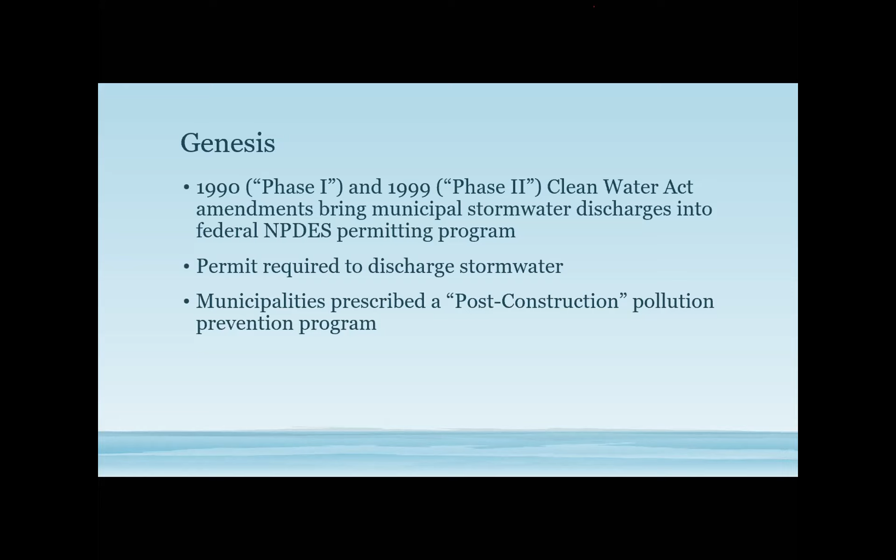But we will go back to the 90s when the Clean Water Act was amended to bring municipal stormwater discharges into the federal NPDES permitting program. NPDES stands for National Pollutant Discharge Elimination System. The powers that be at the time recognized that water quality goals weren't being met by only regulating discrete point source discharges from wastewater treatment plants and certain industrial facilities, and that a significant amount of water quality problems were occurring as a result of discharges of stormwater from municipal areas. The two amendments, phase one, addressed municipalities over 100,000 people, and the second amendment, phase two, addressed the smaller municipalities. Those amendments required that municipalities adopt pollution prevention programs in several program areas. The program area applicable to low impact development was called post-construction at the time the amendments were made.

Post-construction refers to, just like it sounds, the stage of a project from the time construction is completed into the future for the life of the project.

The Clean Water Act amendments recognize that it's not only the pollutants running off these developments, but also the quantity of water running off these developments that causes water quality issues downstream. The Clean Water Act language stated an explicit goal for developments to maintain pre-development runoff conditions to the extent practicable. So it wasn't a hard line, you shall maintain pre-development runoff conditions, but it was definitely a recognized goal.

Out of the recognition that there are these water quality issues associated with pollutants and water quantity, the Clean Water Act required that both structural and non-structural BMPs be developed and implemented for municipalities to impose on new and redevelopment projects in their jurisdiction.

Over time, the sum collection of these BMPs, at least in our North Coast region, the term kind of morphed from post-construction BMPs to low impact development, or LID BMPs. So that's the term we currently use here in the North Coast region and many other parts of the country.

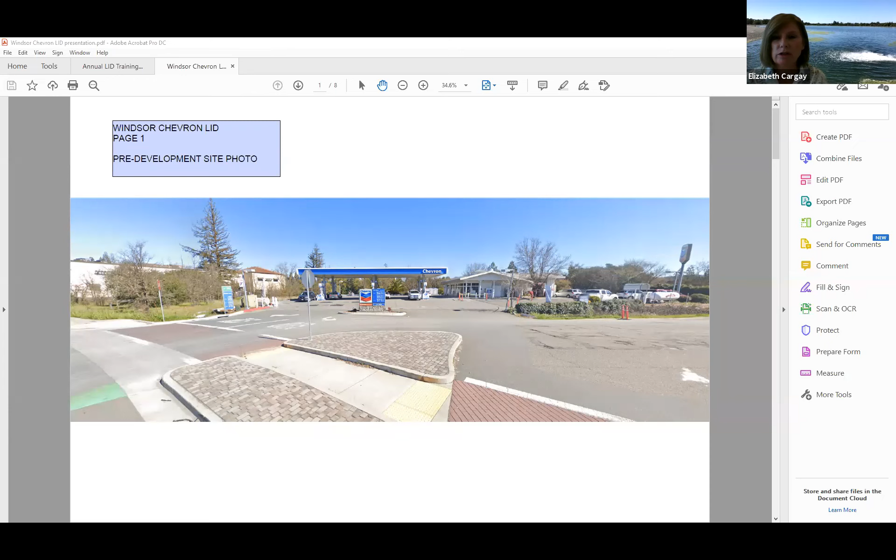And so this is the Chevron gas station in Windsor. It's right off the freeway. All right, Matt, take it away. Okay, great. So can everyone see the picture of the Chevron station in Windsor?

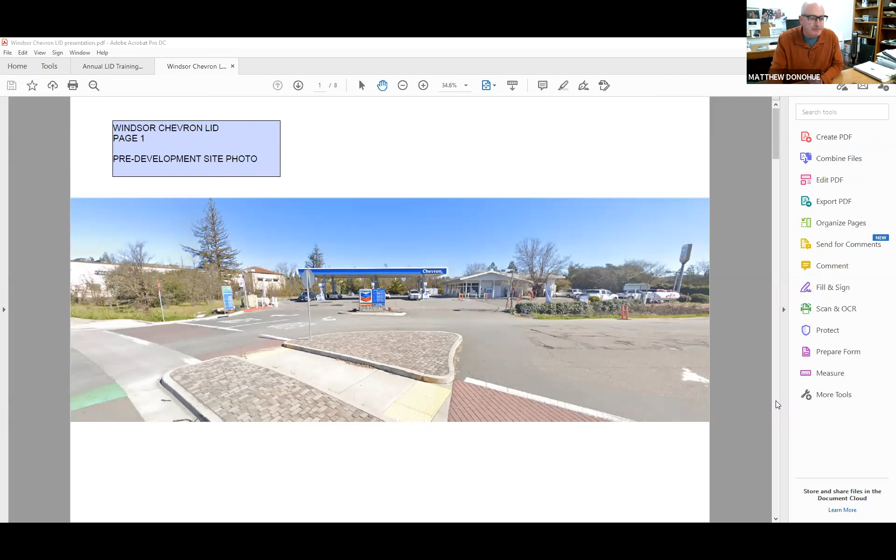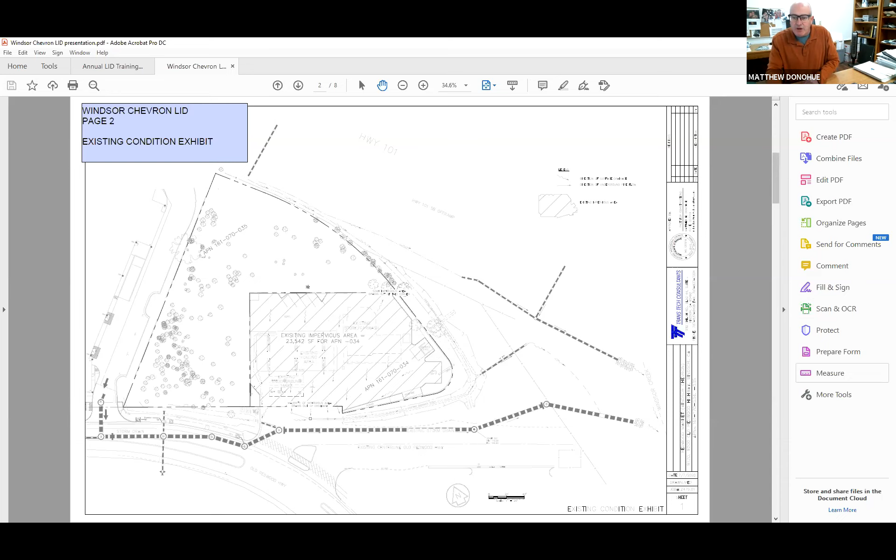I'm going to move on to the initial development plan. Let me go over some of the features here. One of the fun things is this pedestrian bridge overhead. Part of this project is to bring a pedestrian bridge over Highway 101 to connect the east and west side of town.

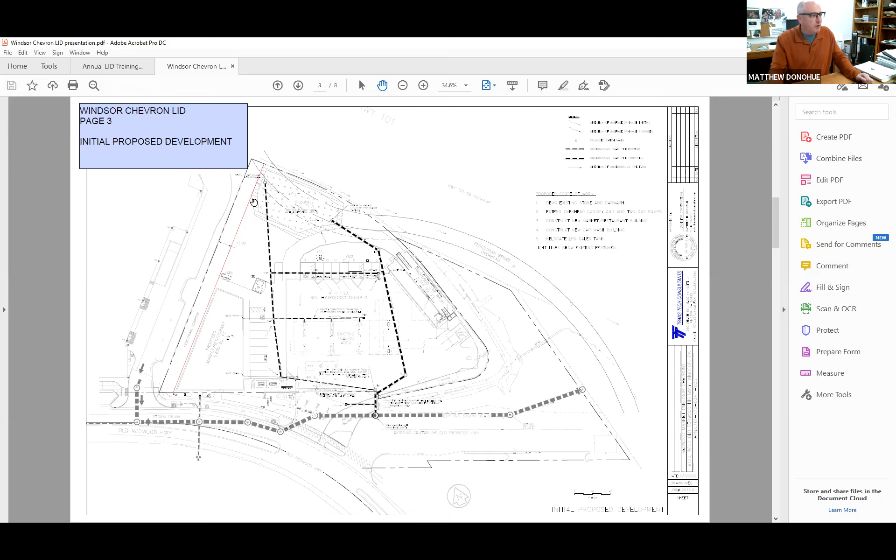The development plan was to demo this store and build a new store over here, put in a new car wash, and the pedestrian bridge. It was subject to LID because it created or replaced about 26,000 square feet, which is more than 10,000. Because this is less than an acre, treatment plus delta volume capture is required. We also proposed a generator that could power the stormwater pump in case of power failure.

The water board rejected this proposal because they felt infiltrating stormwater into the ground at this site would aggravate the contamination situation. They gave us a couple of options: either find an offset project to do your infiltration, or mitigate the risk to groundwater resources.

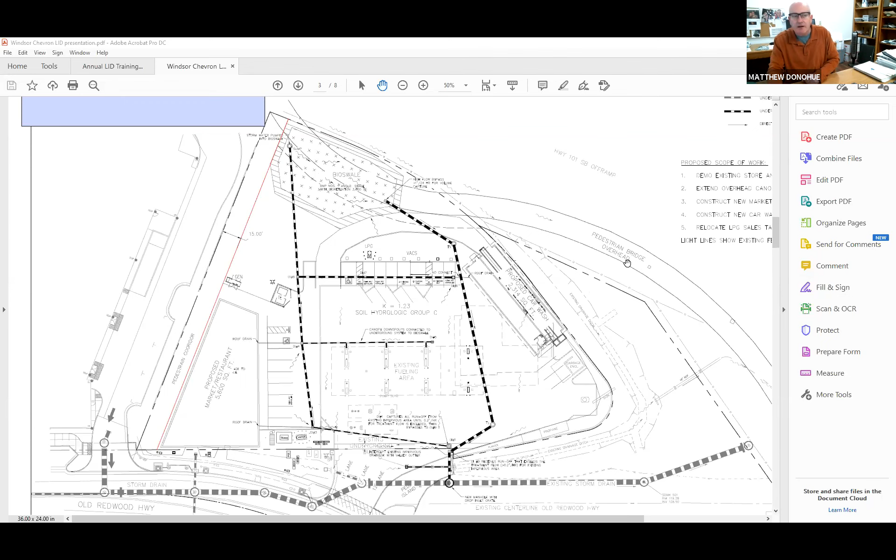So we tried to do the mitigation at first, and that is this plan. Let me zoom in here. This is a map from an environmental consultant - it was a barrier plan. This blue line was a proposed groundwater barrier. The contamination is here where the tanks and dispensers are, and here was the proposed bioswale. What's not shown on this map, but critical to point out, is that groundwater flow direction was from north to south - basically the bioswale was directly upgradient of the contamination.

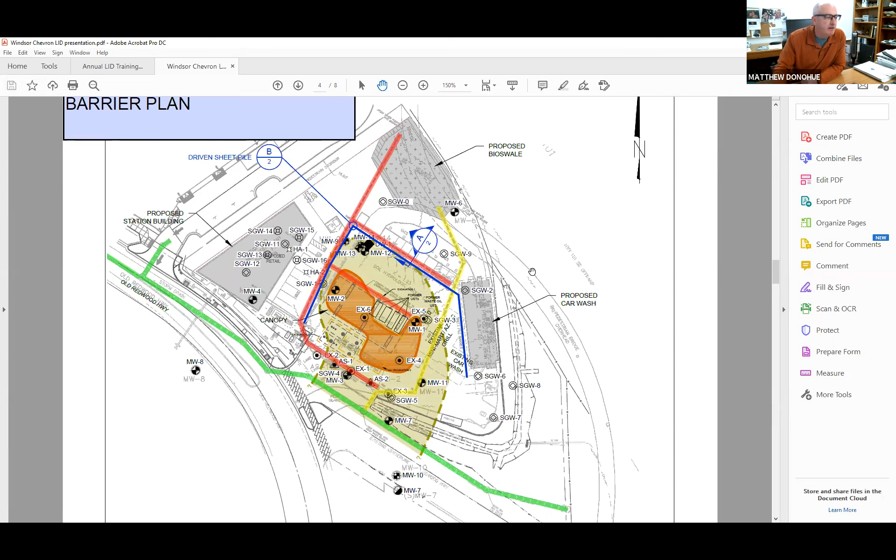So that's obviously what the concern was. We had proposed putting in a barrier so that when stormwater was discharged in this bioswale and some infiltrated, it could move around the contamination and not spread it. I've got a section drawing showing a section view of the barrier - it would be 15 feet of steel sheet piling, and the top 5 feet would be a 20 mil plastic membrane, which would direct the groundwater around the contamination.

This concept was declined by the town, and the town offered a location to do an offset project at Building 100 at Public Works. And I think Elizabeth has got something to say now.

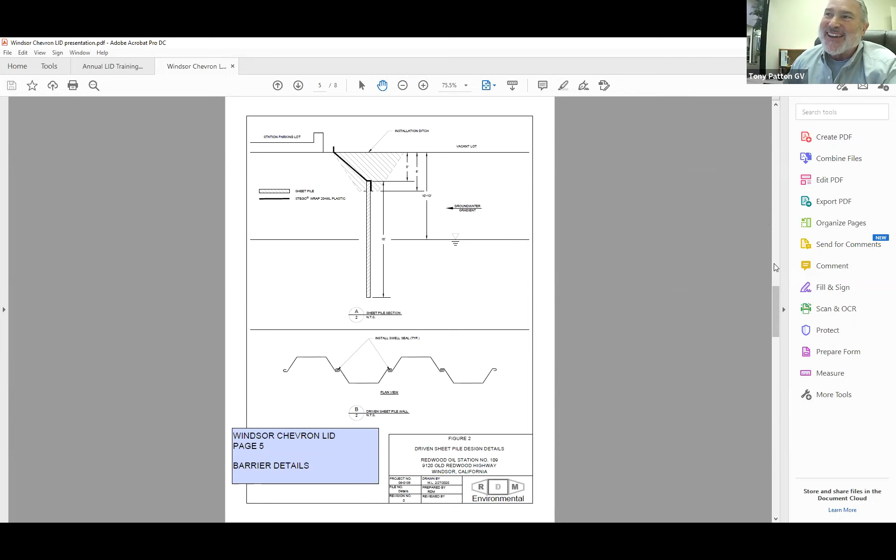Okay, thank you. So from the town's perspective, we talked to the regional water board, and the water board requested that Redwood Oil and the design engineer consult with the town to ensure, they used these words specifically, that the town would be able to effectively oversee the operation of a treatment configuration and ensure compliance with our permit.

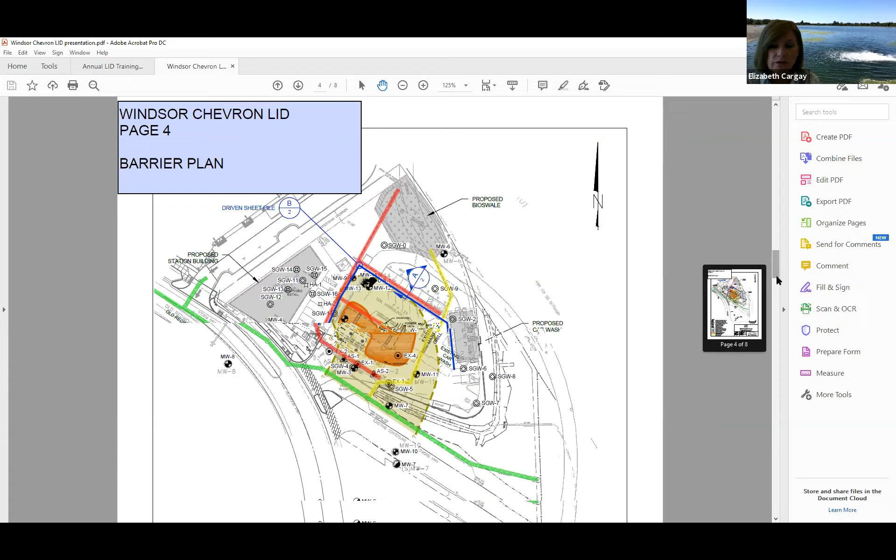So we reviewed the location of everything, the groundwater depth, flow, and direction. This bioswale, to reiterate, was proposed to be constructed up gradient and within 75 feet of this petroleum groundwater plume. Past monitoring data showed that a couple of times the groundwater had come within 2 feet of the ground surface, so it was very shallow.

But in the end, in reviewing all that data, the town was not supportive of this bioswale or any type of stormwater infiltration at the site, due to the potential of mobilizing or dispersing the existing groundwater plume and any potential future groundwater contamination.

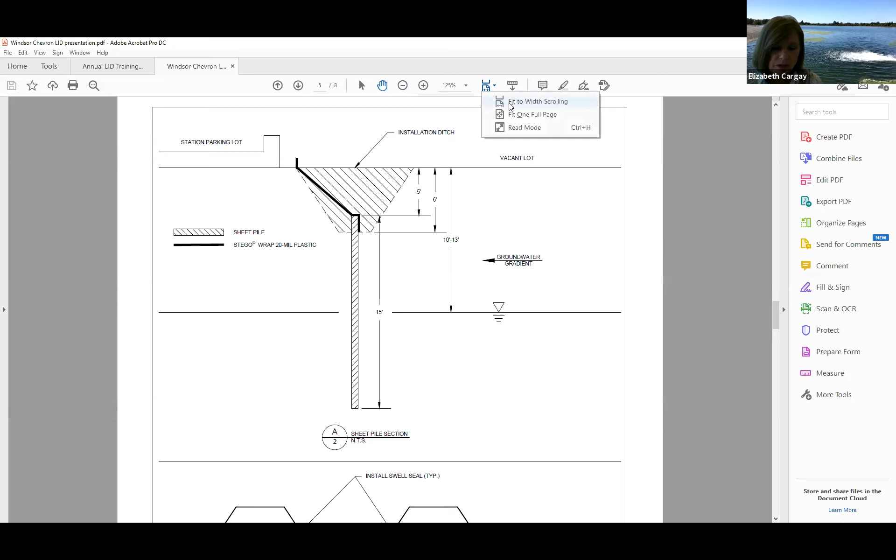Our permit specifically says that BMPs should not be proposed in proximity to a contaminated groundwater site where infiltration poses a risk of causing pollutant mobilization, and site constraints prohibit the ability to infiltrate stormwater due to shallow groundwater. So we really felt we could not effectively oversee the operation of a bioswale system up gradient and adjacent to that contamination, and could not ensure that stormwater pumped into the bioswale wouldn't pose a risk affecting that existing plume or any future plume.

And there's a Shell gas station with a petroleum hydrocarbon plume across the street, down gradient of it also. So there were too many factors. The town just worked with Matt to determine the offset project, so Matt can tell you about this project.

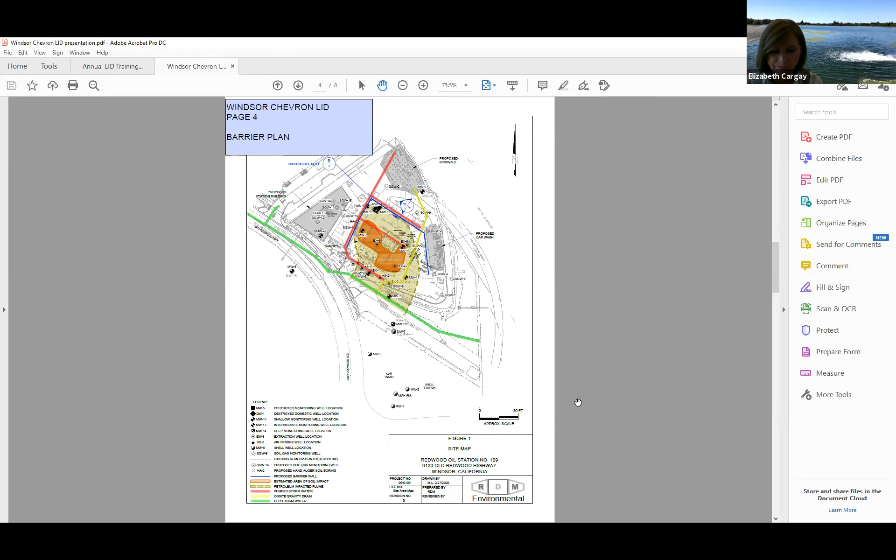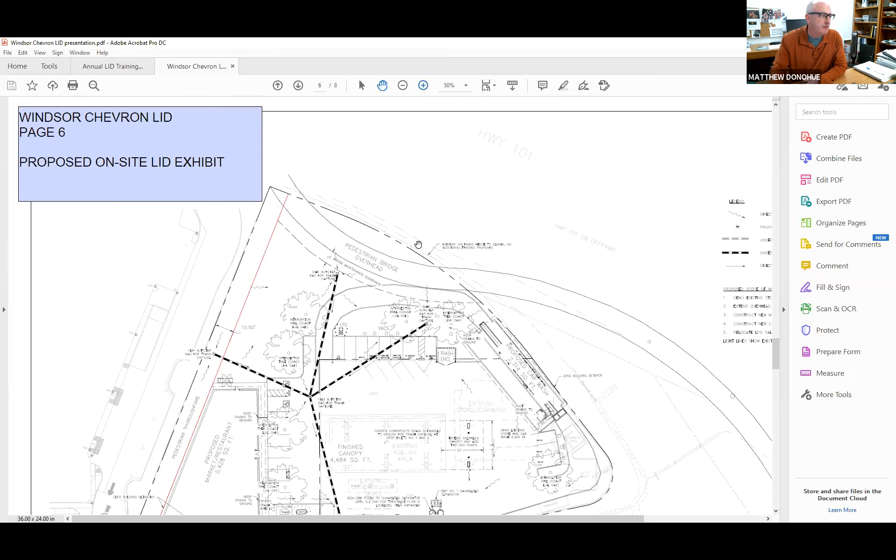Okay, great. The way I have this presentation set up is that first I'm going to show our new site plan without a bioswale and talk about what we are able to accomplish on site, and then we'll look at the offset project, which is on the town of Windsor property. So this is the plan without the bioswale, but it still has some LID features: interceptor trees and a chambered separator.

Now, a chambered separator is very low on the priority list in the LID manual for a lot of good reasons. But in my personal opinion, a chambered separator is the best BMP for a gas station because it easily captures hydrocarbon spills, and they're easy to clean out using a vacuum truck. Whereas a bioswale, I just think is a terrible BMP to use at a service station because it's not a good way to capture a spill, and it's very difficult to clean if one gets in there, as we already have a contamination problem.

But as you know, the bioswale, or the wetland, there are a couple different words for it, is sort of the only option you have to treat some of these contaminants, trying to treat dissolved metals with some sort of technology. You find it's very difficult to implement on a small scale site like this. That's my finding from not only working on this project, but also from doing industrial stormwater consulting. It's very difficult to get dissolved metals out of the water once they get in, but the bioswale just allows you to show that as treatment.

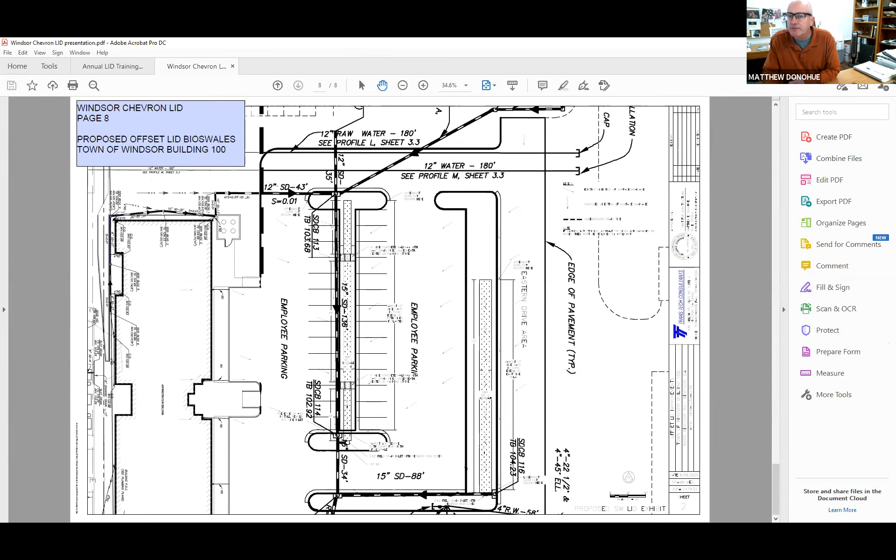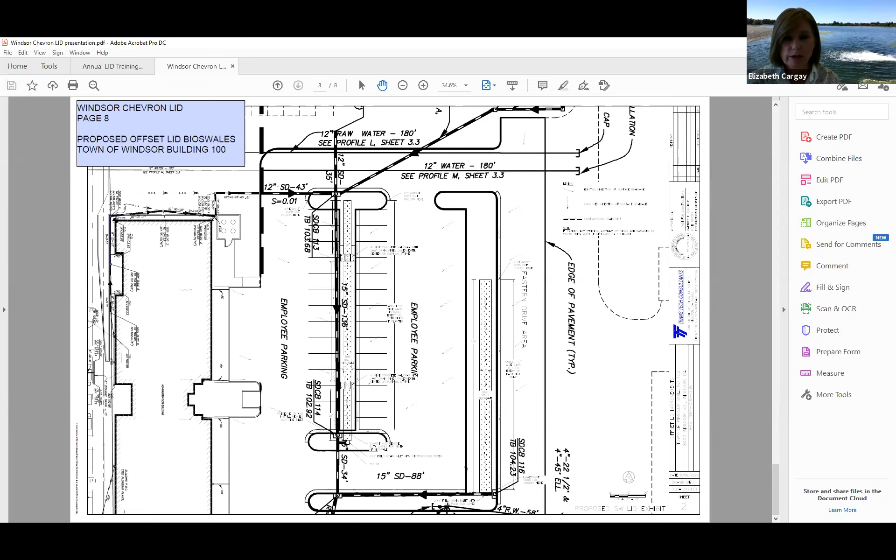Elizabeth? Yeah, so we presented this to the water board, and they were open to allowing this offsite offset project. They wanted to encourage it, with two things they asked for: to maximize opportunities like interceptor trees on the project site, and to propose the chambered separator be modified to see if it could remove the metals.

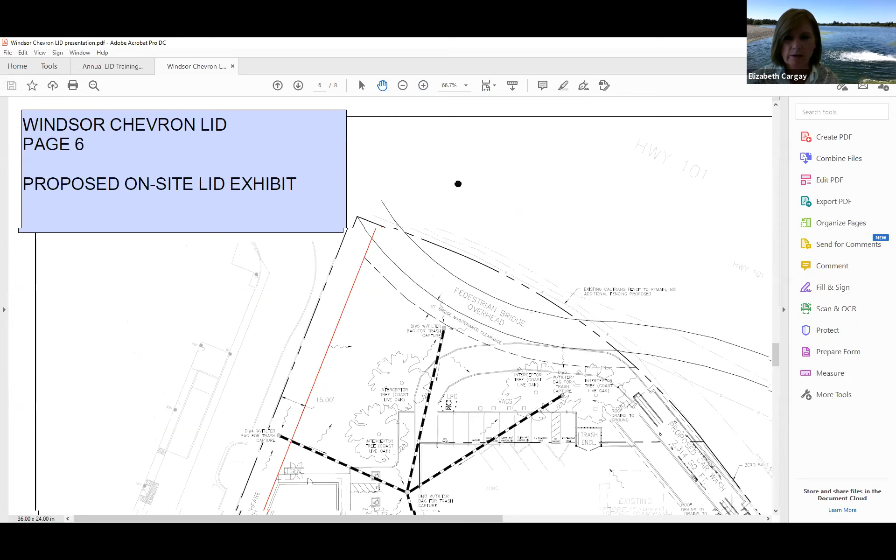I think Matt kind of talked about that, but he was able to add some things, right, Matt? Well, I haven't added anything to the chambered separator that I can show in any meaningful way with calculations that will help remove dissolved metals. So this proposal basically says dissolved metals is part of the offset. But the chambered separator does have some socks in it that suck up hydrocarbons and other oily materials, plus the natural gravity action and everything else it's good for. That's something you have to work out with your water board, because it's just not in the manual about exactly what is offset and what isn't. In this case, we're offsetting infiltration and dissolved metals treatment.

But you did add a few trees, right? You added some, a bunch of interceptor trees. Yeah, so you did do that. With those changes, the water board accepted the project, and Matt is now in the design phase.

And that's the end of our presentation. Any questions?

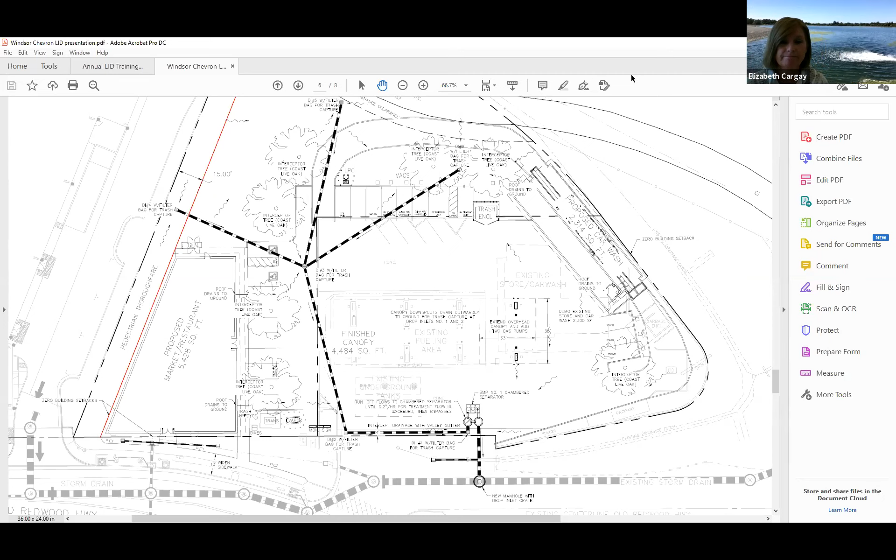So on those interceptor trees, do they have that structure the tree goes into — we did some on Stony Point years ago — or are they just trees planted in the ground? They're just trees planted in the ground.

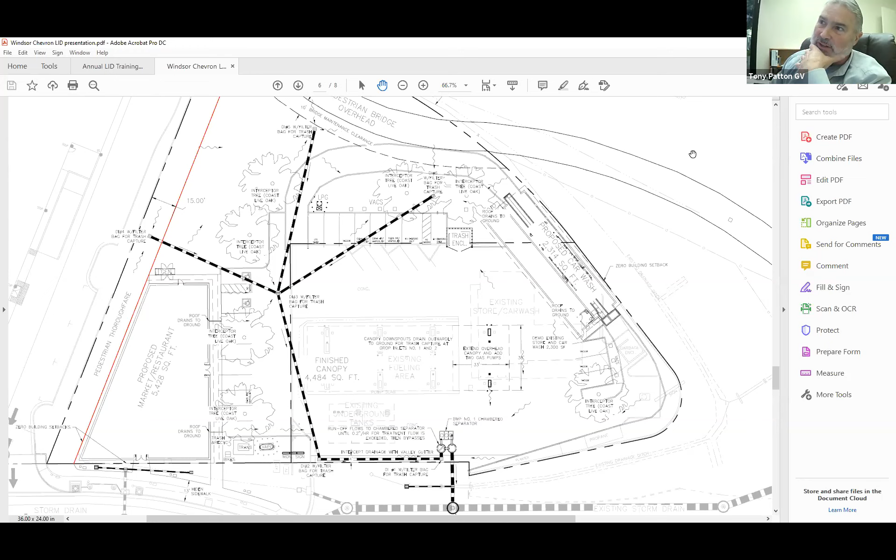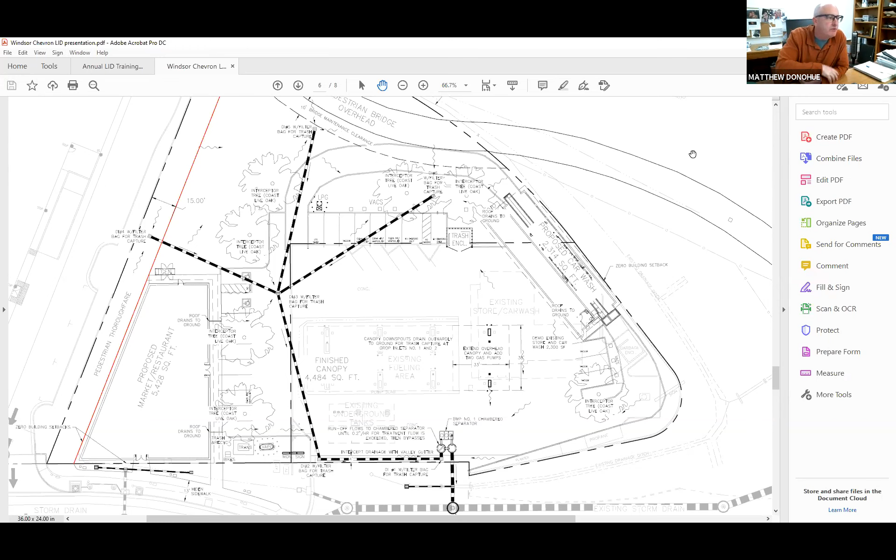In other words, we're not claiming any sort of infiltration area around them, for obvious reasons we're not allowed to. So you're just using the natural effect of what the tree does, and you're not adding anything to it. Okay. Yeah, I suppose interceptor trees capture some storm water and release it more slowly before it hits the ground. But once it hits the ground, there's no infiltration on this site. So the treatment then goes to the filter bags and the catch basins, and then to the chambered separator. Got it, all right, thank you.

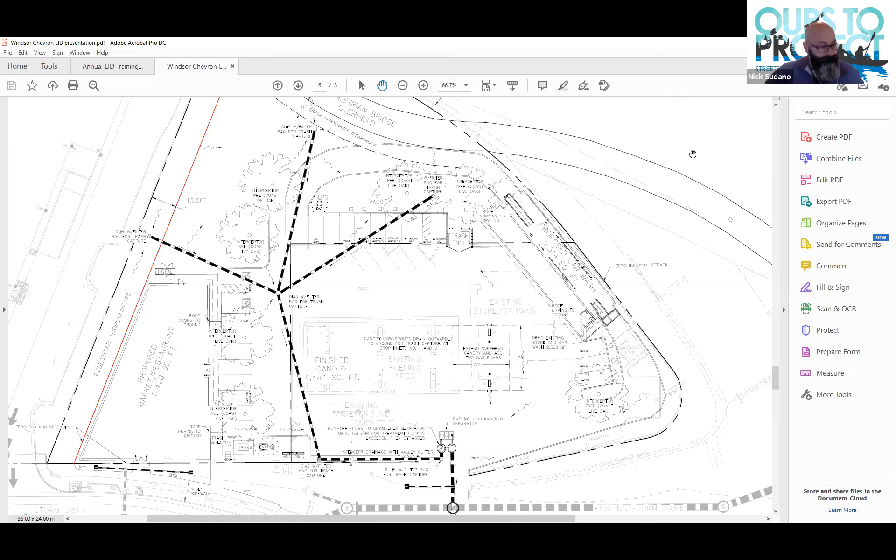All right, anybody else out there with a question? I have a question, Nick. Go for it, Rick. I was just curious, since this project is for an offset for the gas station, does it also...

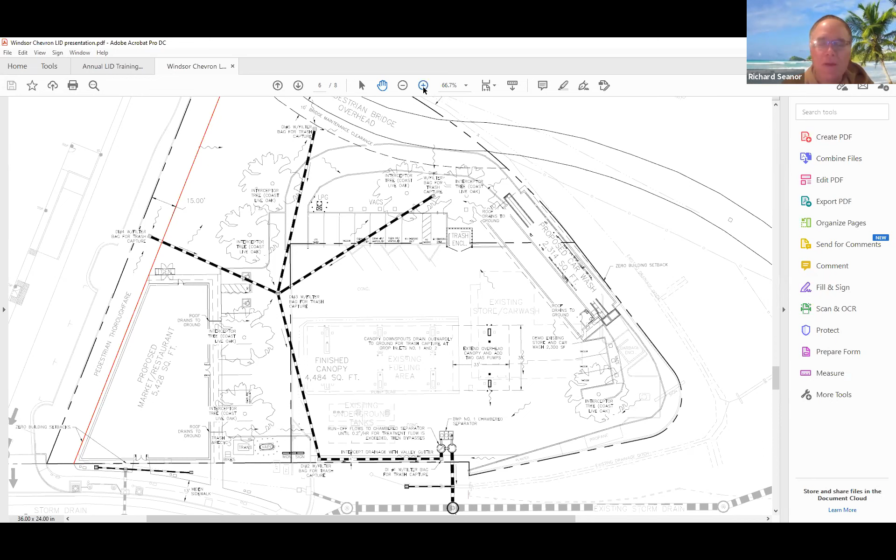Does it provide the LID treatment for the entire city site, or does it only qualify as the offset for the gas station? Say, for example, if you were going to do some future expansion at this location, would this proposed LID account for that?

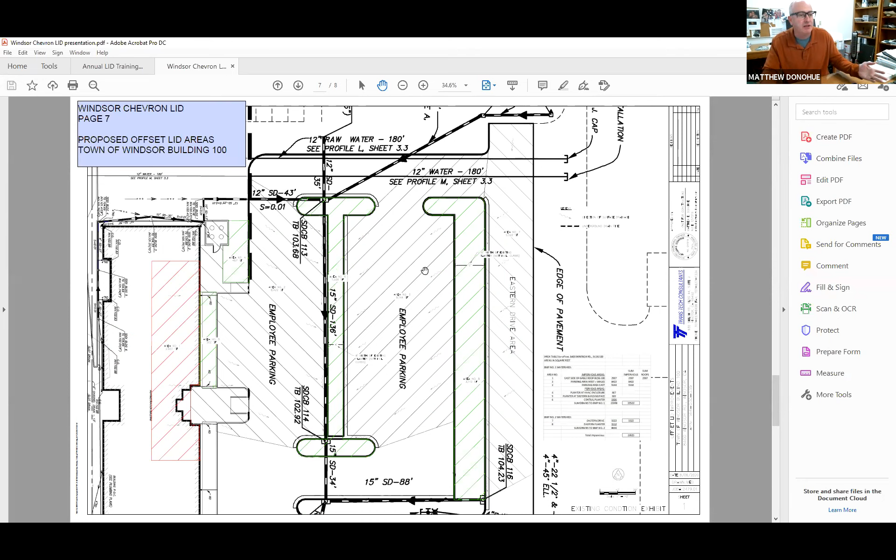No. Right now it's perfectly balanced at 26,000 square feet of impervious surface created or placed at the project site and treated at the offset site, shown here. Now there's a lot more to the corporation yard than just the offset area — there are acres that we could potentially treat. As you correctly pointed out, there's more undeveloped area here at the site that in the future they could potentially ask for a permit to develop. That's this area right here. But the pedestrian bridge occupies a lot of it, and that's going to be an easement — they're not going to be allowed to go in. So it's actually a small area here, plus this planter behind these parking spaces.

So I don't anticipate that would be developed in the future, but if it was, they would have to offset. They'd either have to show that the site's finally clean, or they'd have to do another offset project. And I don't think, Rich, that we'd be able to double dip. If we expanded something on our corp yard, we'd probably have to infiltrate somewhere else. We wouldn't be able to use that project as offset also.

Right, yeah, thank you for that explanation. I was just remembering the corp yard and suspecting it was probably developed before the LID requirements. Yeah, it was.

We have two more questions in chat here. The first one is, who's responsible for maintenance at the offsite project? Okay, so the developer here is a company named Redwood Oil Company, and they're going to be responsible for LID maintenance on site and at the offset forever. What they do is they're going to be paying into our lighting and landscape district, so the town will actually do the work, but they will be responsible for the cost of it.

And are the offsite offsets restricted to the same catchment area? I think typically we like to say, are they restricted to the same trib? Yeah, well, they're both drained to the Windsor Creek, yeah, same.

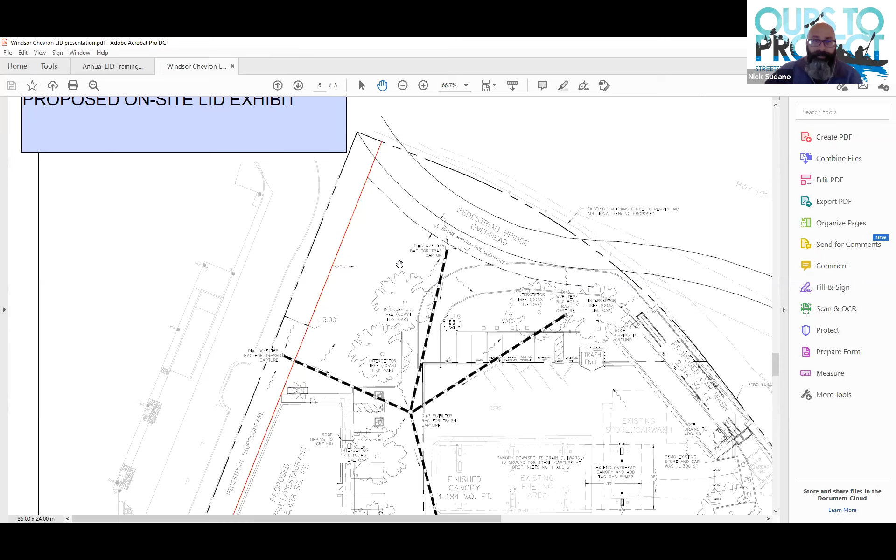Do projects that want to do offsite require approval from the regional water board or just the city? Oh, no, both, for sure. But what was interesting in this project is the board came up with questions for both of us to answer and try to see if we could make the project work. They didn't just say no. They said, well, if you can ensure that the remediation system is going to work, and continue to work, then maybe they'd be open to that. But we were not open to that. We didn't want to take on that kind of liability. So we just said, no, this project, we will not allow that. So we were the ultimate decision makers, but the water board definitely had to approve all of this.

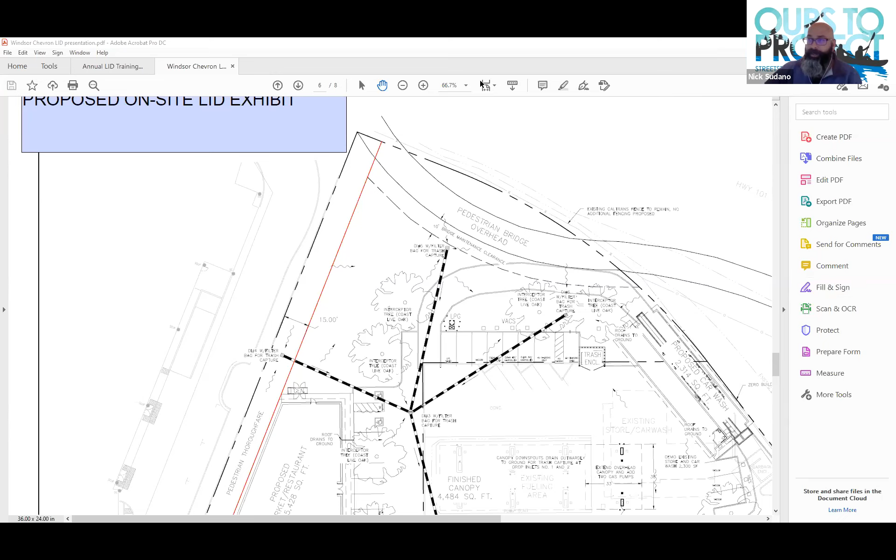And Flannery is going to be discussing LID manual updates, changes, and recent clarifications.

Hi, nice to meet you all. My name is Flannery Banks. As Nick said, I'm an assistant engineer with the Stormwater and Creeks team here at City of Santa Rosa's Water Department. Just wanted to show you guys my face for a second, the half that's not covered. I know I've been pen pals with a number of you already. I recently joined the city, my first day was back in March, the day before City of Santa Rosa all started work from home. So I know I haven't met a lot of you in person, but I do have a face and I'm not just an email. So with that, we will get going.

So at least for the City of Santa Rosa, you'll find our updated manual at the City of Santa Rosa Low Impact Development Technical Design Manual webpage. This is the same webpage that you all should be used to going to and seeing.

The revision is going to be listed under the current tab that we've been using, as a revision to this manual. So I just wanted to clarify that we are not going to be setting up a new page for this, and there isn't going to be a set implementation date, as there's no permit regulated driven changes to this manual.

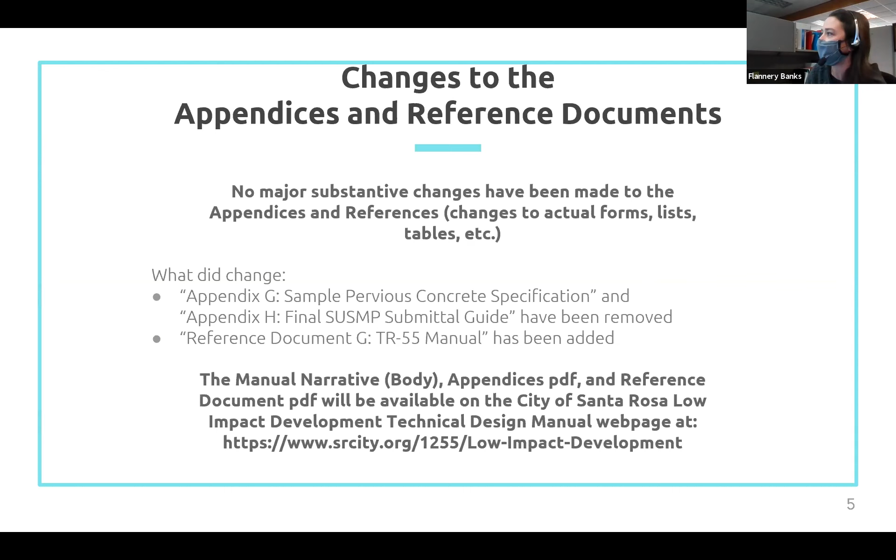This was an important definition because we've also added notes and clarifications throughout the manual that FDR can be regarded as a maintenance activity, which is exempt as long as it is not part of a larger development or redevelopment project, does not change pre-project drainage patterns, and does not expand the footprint of the road. This is something that had been talked about, but it had not been put on paper anywhere yet. So now we have it on paper for you guys, or in this world, a PDF.

The next one, I think a lot of people on this call will probably know this, but we added it for clarity so that we're all saying the same thing. A pervious surface, for the purposes of this manual, are areas that allow for stormwater infiltration into underlying soil as it would occur in undeveloped location in an unaltered condition. We've also chosen to define subgrade.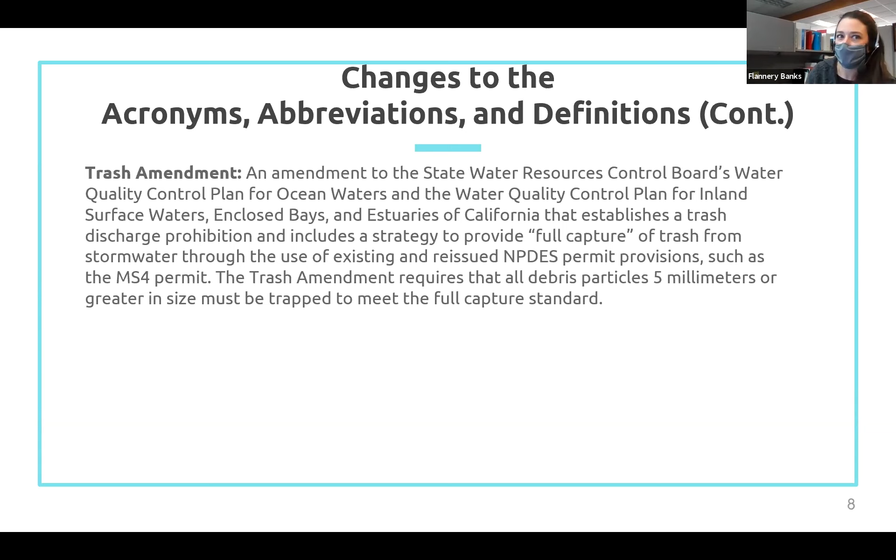The trash amendment requires that all debris particles 5 millimeters or greater in size must be trapped to meet full capture. I know this has been a question for a lot of people, so a couple slides from now I'll clarify a little bit more on that topic.

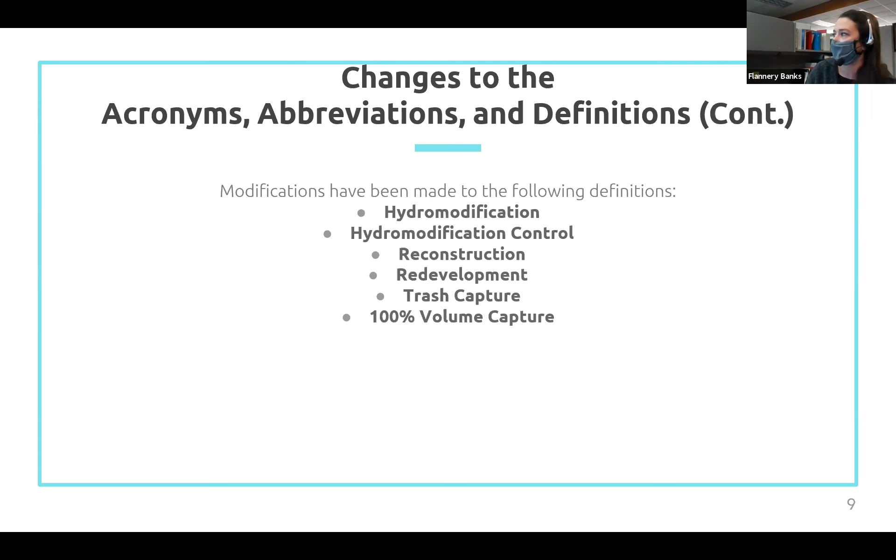A few other things to pay attention to: there weren't major revisions, but there were changes to our definitions of hydromodification control, reconstruction, redevelopment, trash capture, and 100% volume capture.

Another major change in Chapter 1 is in regards to vegetated cover. Text throughout the manual, not exclusive to Chapter 1, has been revised to allow for approval when 50% vegetated cover is not established before the completion of construction. When that is the case, two things need to occur.

Your jurisdictional agency, when doing your plan review, is going to be looking for an erosion control plan for the LID BMPs with sufficient measures to provide soil stabilization and treatment until plant maturity. For example, ground up compost and mulch on all bare soils with rock inlet protection. Just a note, we don't want to see bark, and we don't want to see floatables that can enter the storm drain system without any sort of control. So we're specifically looking for things like ground up compost and mulch that's not going to float directly into the inlet with our first few storm events.

The second thing we need to see is a planting and irrigation plan for the LID BMPs that includes, by plant genus, species, and common name, selected plants, maximum spacing, total number of plants to be installed, and a table with the mature plant size. Again, this is specifically if you're looking for approval when 50% vegetated cover is not going to be established at the completion of construction.

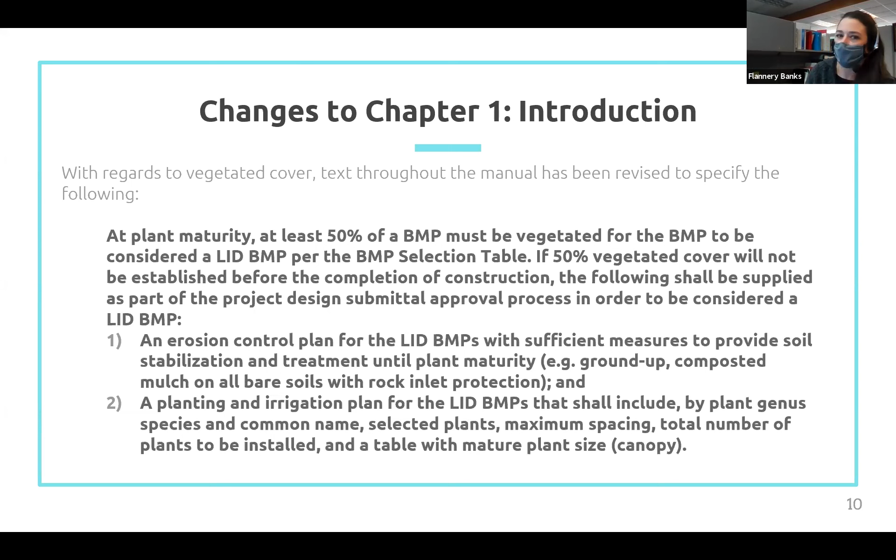Another important revision to footnote 2, which can be easily lost, is the discussion about items considered routine maintenance. We've added a few clarifications on this to specifically call out a few additional items, which includes FDR being regarded as a routine maintenance activity.

For an activity to be routine maintenance, it must not change existing lines and grades or hydraulic capacity. Minor changes to line or grade of 0.2 feet or less shall be considered as maintaining original line and grade. Replacement of existing pedestrian ramps to maintain compliance with current ADA requirements shall be regarded as routine maintenance. So there's a number of new additions to this footnote.

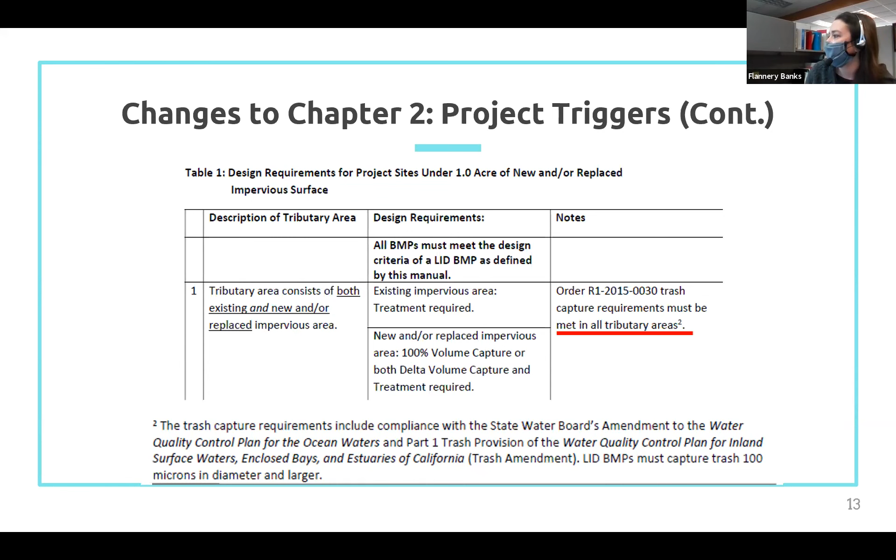So this is the text backing up the same statement. This is not a new requirement — this trash capture is not a new requirement. We found that it just wasn't being clarified because it's a little bit hidden in our MS4 permit, so we specifically called out the requirement.

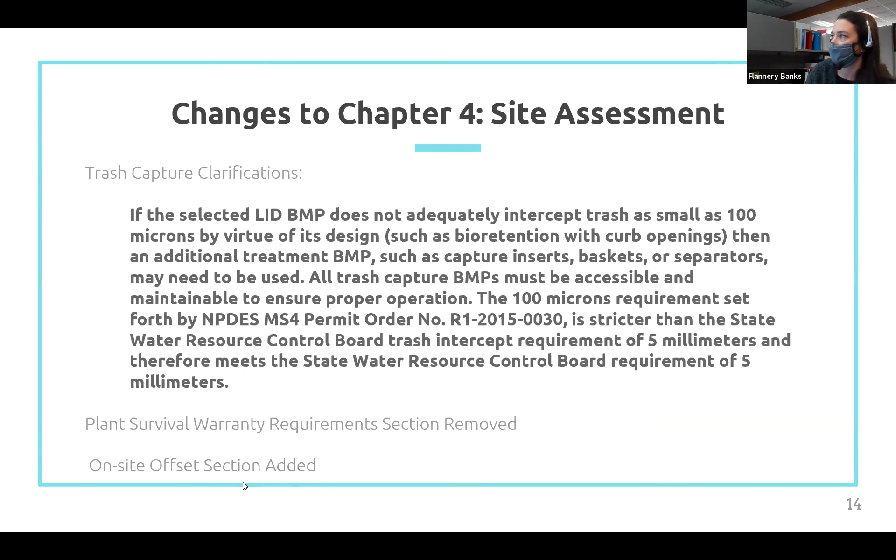We also removed the plant survival warranty requirements section and added a description of on-site offset. One thing the agencies will look for when approving these documents is a very clear justification when any lower level BMP is selected over a higher level BMP. Our language states that anytime a lower priority BMP is selected, justification shall be provided for reasons why higher priority BMPs are deemed inappropriate. If we get a submittal without that statement, that's going to be one of our first questions back for revision.

Finally, just to point out a few more — make sure there are minimal changes to the submittals, but justification of the lower priority BMPs is required. We're requiring to see the maintenance and funding sources, which will be touched on, with an example shown a little later in these presentations. And then, of course, the required planting, erosion control, irrigation, and inlet protection if needed.

And that's all I've got. When we release this manual, please make sure to read through it, but these are some of the major changes that we thought you'd all be interested in.

Does anybody have any questions for Flannery, or additional clarifications that weren't addressed that need to be put in the manual? Go ahead, Pete.

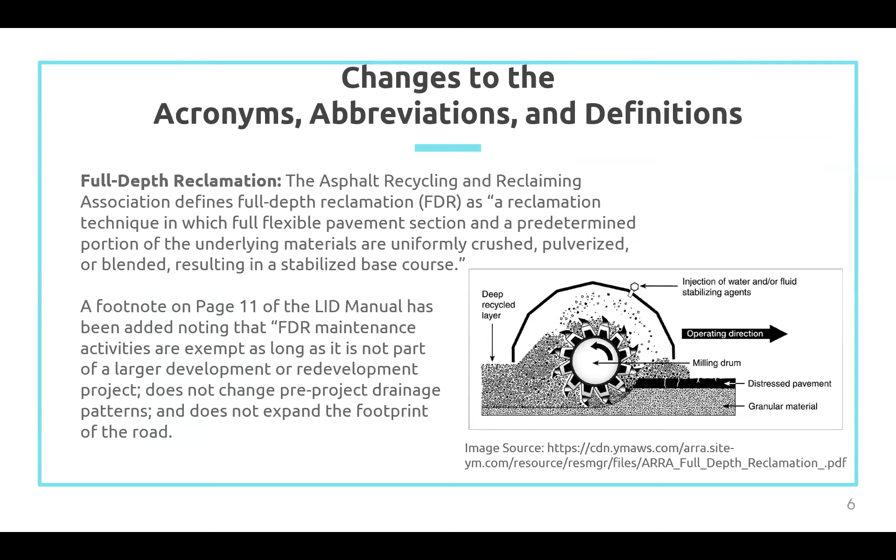So one of the things we've run into is that technically we would be getting into the subgrade of the roadway, and many of the projects greatly exceed the 10,000 square feet, but they're still short enough projects where the FDR process is not economical. Generally, those are longer projects because you have a lot of equipment to mobilize to make it cost effective.

Like a project like Stony Point reconstruction would be a candidate for FDR, but a residential street would not be. So my question is, if we have to thicken the roadway section and get into the subgrade, technically we're still rehabbing the existing roadway structural section, but does that trigger the stormwater requirements, LID requirements, and more specifically how do we go about doing that in a residential area where we have curb and gutter and contiguous sidewalk with no areas for planters?

Yeah, so that does trigger LID if you're entering the subgrade. The exemption to that would be a super T trench, where you can do trench work specifically for utilities, and it can be that larger super T trench. But the board has clarified with the co-permittees that as soon as you're exposing or entering the subgrade, you're going to be triggering LID.

So a project can be an exempt project until the point at which it does an activity which is not an exempt activity. So if it follows that flow chart and the pavement section is exposing or entering the subgrade, by the permit definition, that's considered excavation to roadway subgrade, which is considered reconstruction, and reconstruction is not a maintenance activity.

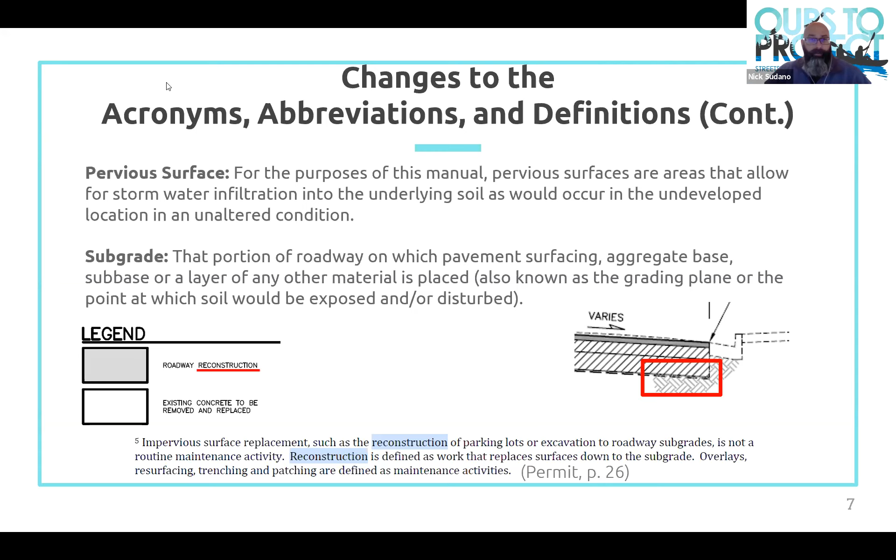And next, we've got a case study presented by Jonathan Caldwell from the City of Cotati and Kevin McDonald from Mo Engineering. I would request maybe, John, do you mind just starting and telling us why you selected this case study?

Kevin McDonald with Mo Engineering is here to briefly discuss the stormwater review process and highlight some of the key components of what made for an acceptable LID design. The goal is to shed some light and give some tips on what goes into the LID review and approval process. I figured Kevin would be a good one to go through this, as Mo Engineering assisted the city with the project development review, not to mention various other aspects of the project, including inspections during construction that continue to date.

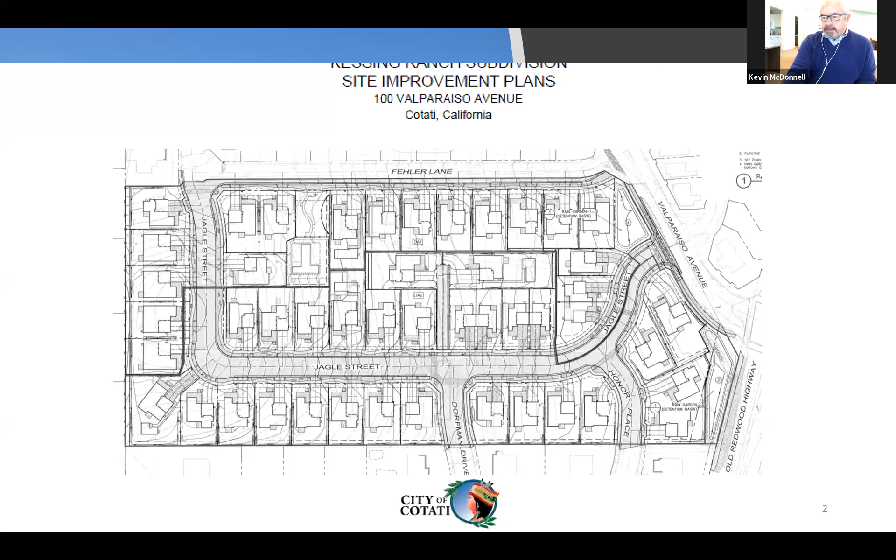One of the key things to remember is that subdivisions change over time. Here's the layout of the subdivision, but an earlier view of it had a street down the middle. So you need to stay in touch with all the details from the initial submittals to the final submittals. In fact, this project was first submitted in 2009 with 64 units, not the 45 it ended up with.

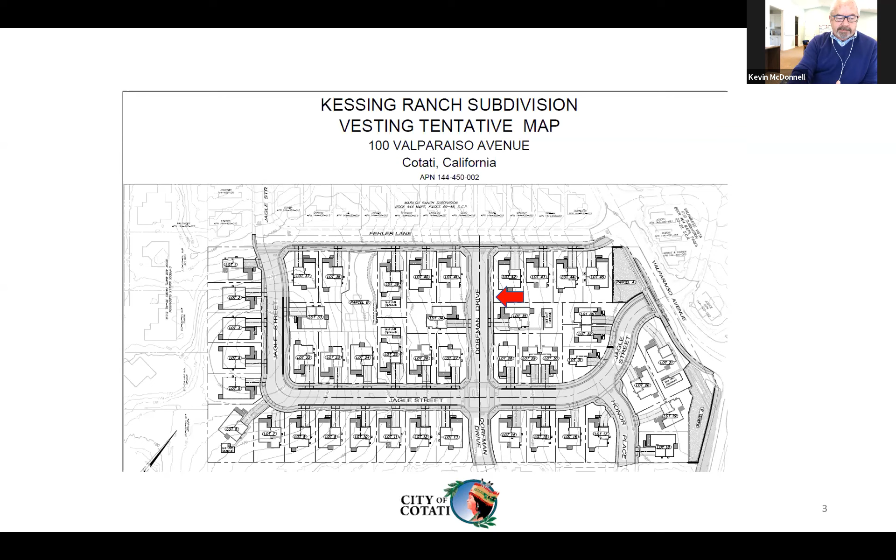And 2009 actually predates Cotati's inclusion in the MS4 permitting system. The preliminary SUSMP came in 2016, and the final stormwater plan not till 2018. So things change, and you need to stay in touch with that.

So in the submittal, many important parts are included. First is a good project description, and not just of what's being built, but also of how they're planning to treat the runoff. This project calls out that there's hydromodification and 100% volume capture. That's important there. And then how they plan to capture that—what measures are included.

In this particular project, they broke it into 2 different basins, so all the water from the whole subdivision goes into 2 basins. That minimizes the number of calculations, but it does put a lot of water in one place. Further, they detailed that the runoff from the roof downspouts, driveways, new pavement—they're commenting on all the important parts of the project's stormwater collection. That's important for a reviewer to see, and then be able to track that through the project.

In addition, they talk about the treatment and volume capture as a specific element, and that it's going to be into a rain garden or swale process. And then also a key part: the maintenance and funding. We need to be sure that there's a plan for maintaining this long term, and that plan is funded.

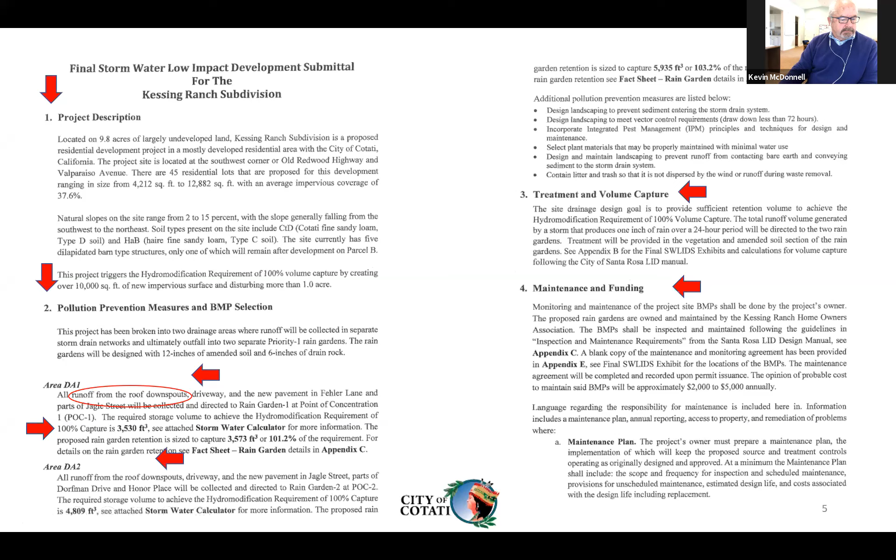These are all just the details that we checked. And then of course, the first detail is, does this project hit the triggers? Since it's over an acre, yes, it does.

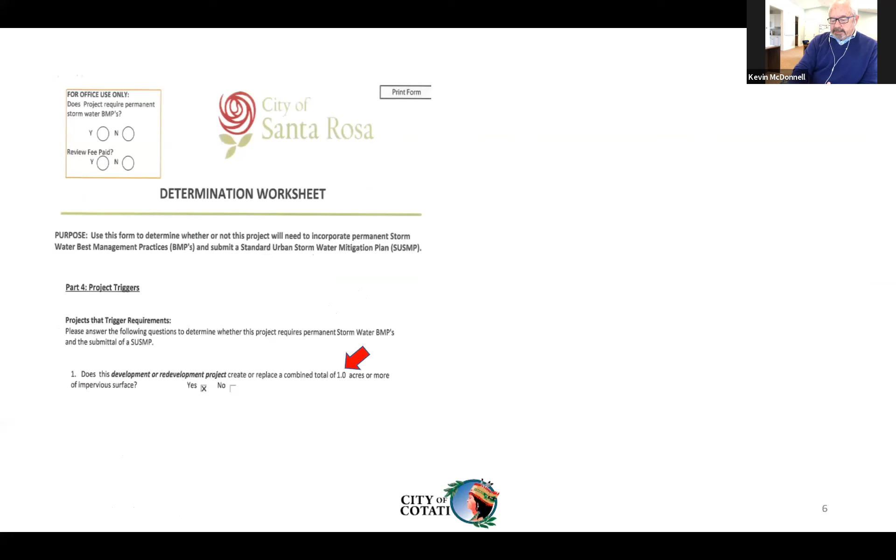And then they get into the calculation element. Each of the drainage areas needs to have the calculation clearly presented, showing also what reduction measures are used, and in this case, they do take credit for it. So again, attention to detail from the reviewer and consistency between documents is needed. Often things get flagged as one thing in one document, but different in another. It's an attention to detail aspect.

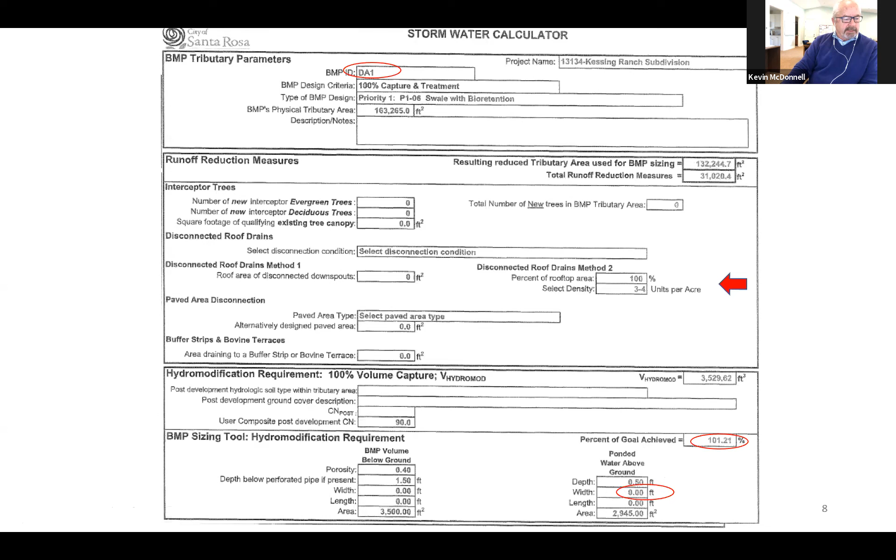The bottom line is, do they have the 100% capture, and with what method? Below ground, they identify an area rather than a length and width, and that's acceptable. They also identify the depth in that volume area, and that'll translate through to the plans—you need to keep an eye on that element. Above ground, they allow for water above the surface with a maximum of half a foot, and again, it's an area, not a length and width. So these are just details to keep in touch with as we move into reviewing the plans.

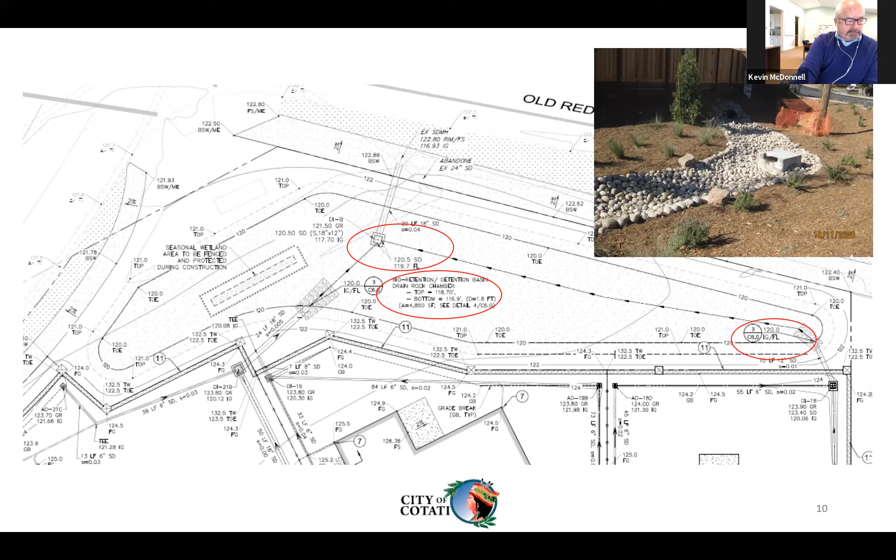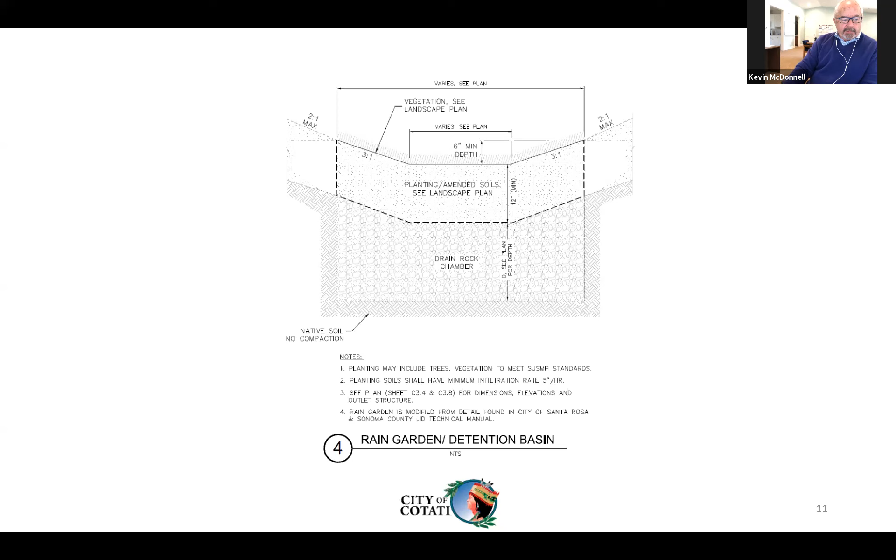Also, somewhere on the plans it's important to again have the rain garden that was shown in the calculation and submittals early on. There's a certain amount of consistency that needs to be had that is the elements we check for. So the elements, in addition to all those tied together parts, there's a few other lessons that come to mind at the end of this process.

One is, when is the right time to record the maintenance agreement with the county, which is one of the necessary steps in this process. What we're finding is that it's best to receive an executed maintenance agreement with the development at the time of plan approval. Things change in construction, and that's to be expected. So we don't record it immediately. We sit on an executed document until we can confirm and inspect that the BMPs have been constructed per plan. Only then do we take the document and record it with the county.

A lot of the lessons from the reviewer point of view is that all of the LID submittal needs to be confirmed with plans. That's usually not trouble with the civil firms, but coordinating with landscaping is the challenge. So getting good attention to the landscaping plans is also one of the elements we focus on. And then not just that the plans are confirmed, but that actual construction goes the way it should. Again, the plans are the common communication tool with construction contractors, and that goes well, but less so with landscaping construction. A lot of times we find the base materials contaminated by irrigation efforts or other efforts. So communication with the landscaping firm when the construction starts is one of the other keys.

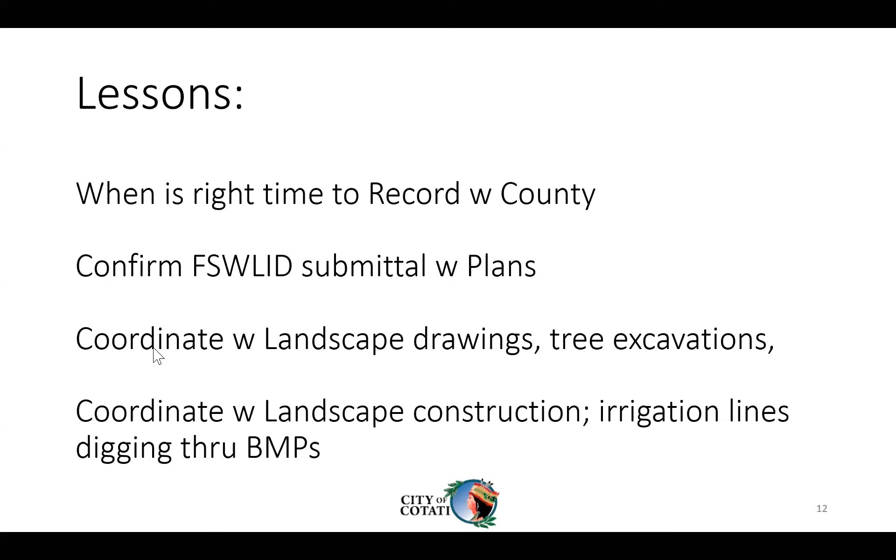I'm wondering about the public storm drain system. It was hard to see the drawings, but I assume there's a public storm drain system in those streets, and that they're probably public streets. So it goes from the lots into the public street, into the public storm drain system, and then into private property, through the treatment basin, and then it exits out. Is that correct?

Yes, each of the lots exits onto the public street, the new developed subdivision street, which then conveys to the basins at the low elevation of the development.

So one of the concerns I see is that the city might have some liability because the water is not being treated before it goes into the public storm drain system. I can see that per the calculations, one basin for a subdivision will be adequate to the state board. But I think there are liabilities the cities have to consider, that these untreated flows go into the storm drain system and then flow back onto private property and exit back out to the public system. Like, say one of the neighbors wanted to dump his oil out into the gutter, and it got into the storm drain pipe, and then up into this basin.

So yeah, I agree with what you're saying and understand the risk. The basins are owned by the homeowners association of the properties, and all the drainage is from the member homeowners. But you make a good point.

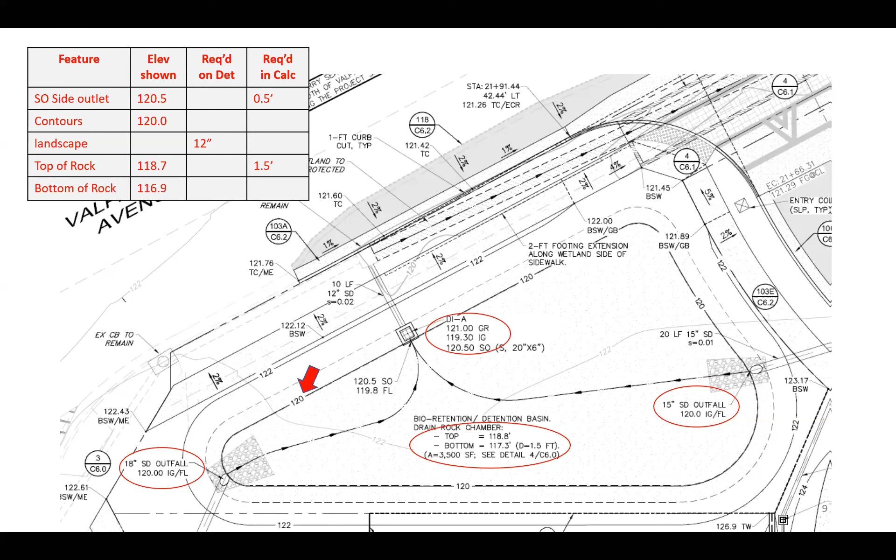Well, all will still run through the homeowner basin prior to discharge. But you make a good point, and the city has tools to do that during the planning and condition of approval phase. That's a good discussion for each city to probably carry forward. Okay, thank you.

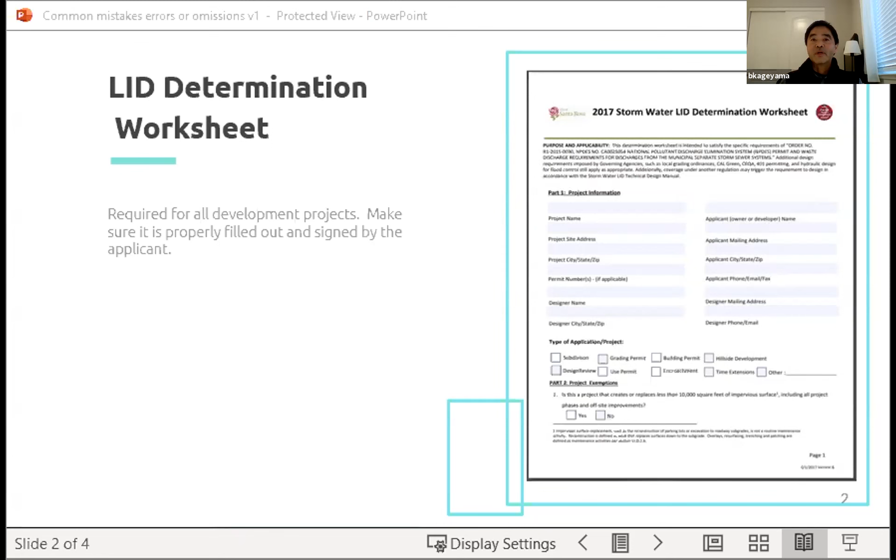For both consultants preparing the SW-LID submittal and for public agencies reviewing it, the first thing is to check for completeness. Chapter 6 of the LID manual spells out the submittal requirements in detail, but there's also a convenient SW-LIDS checklist in the submittal guide, which can be found in the LID manual tools and reference documents.

I'm not sure, Flannery mentioned that the submittal guide might be removed from the update, so that's something I want to look into. Hopefully some form of checklist will still be available.

Be sure to check carefully for consistency between the various application components, which is where I usually find errors. These include all of the parts of the SW-LID submittal and the other documents of the development application.

These components include the SW-LIDS narrative, existing and proposed exhibit maps. These maps should show pervious and impervious areas, tributary areas, soil type, proposed BMPs, etc. BMP selection tables, stormwater calculator, BMP details, the maintenance plan, which is typically part of the narrative and defines the funding source, identifies the responsible party, and provides detailed maintenance checklist for the BMPs.

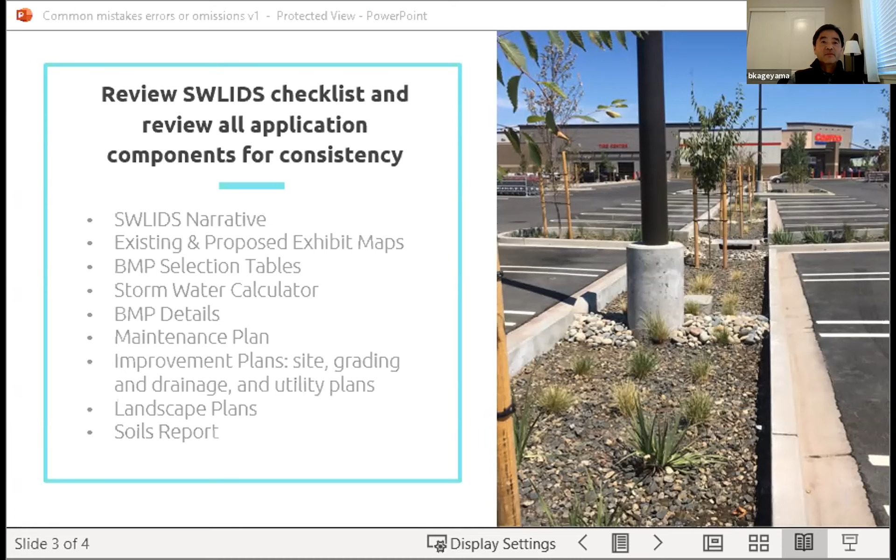Hey Ben, does the city of Healdsburg require exhibit maps every time? Are they always needed? Exhibit maps and what? In the maintenance? So the question is, are existing exhibit maps always needed? In the maintenance agreement? I think from your previous slide, from your submittal. Oh, if you go back a slide, I think you have up there existing and proposed exhibit maps. Yes, so the question is, are they always needed? Yes, yes, they should always be. You always have to have that. And Nick, that wasn't specific to Healdsburg, that's across all the co-permittees.

So these are just a few typical issues to look out for. If I were to offer three simple suggestions for improved SWLID submittals, I would say: one, to ensure a complete submittal, refer to the SWLIDS checklist or chapter 6. Two, review your applications carefully for consistency. And three, get feedback from your local agency staff throughout the project development process.

I think I can say this on behalf of all of the MS4 co-permittee agencies: we are available and happy to assist with your LID projects.

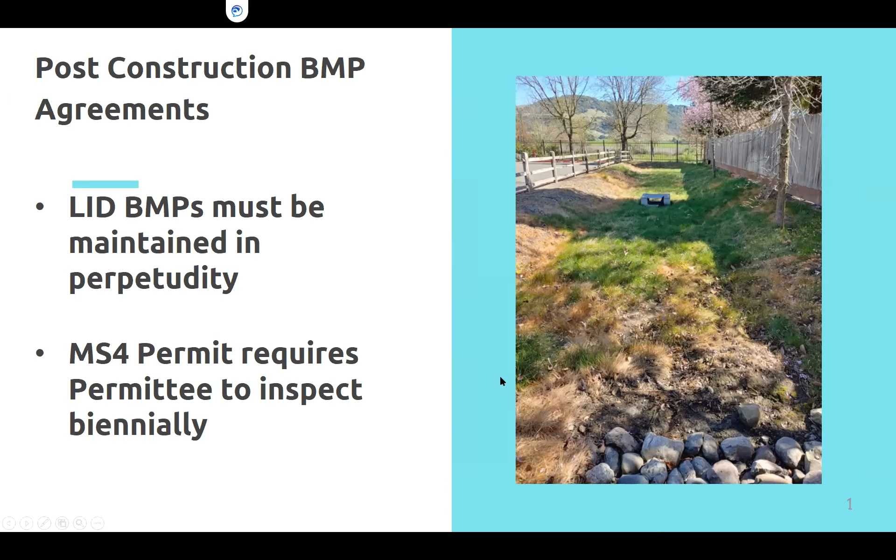As part of the initial stormwater LID submittal to your jurisdiction, a draft of the declaration of covenants, or DOC, is required to be submitted. This document will be recorded on the deed of the property prior to the closeout of the project. This document spells out the requirements placed upon the owners of the property once everyone else involved in the project has left. Included with this document, there will need to be an exhibit for the legal description of the property.

In Sonoma County, we require a pared-down version of the stormwater submittal plan showing just the final location and type of BMPs that will be included in the DOC. So then when we go out to inspect the project two years after completion, we can easily find the BMPs and identify what they are and the vegetated components associated with them.

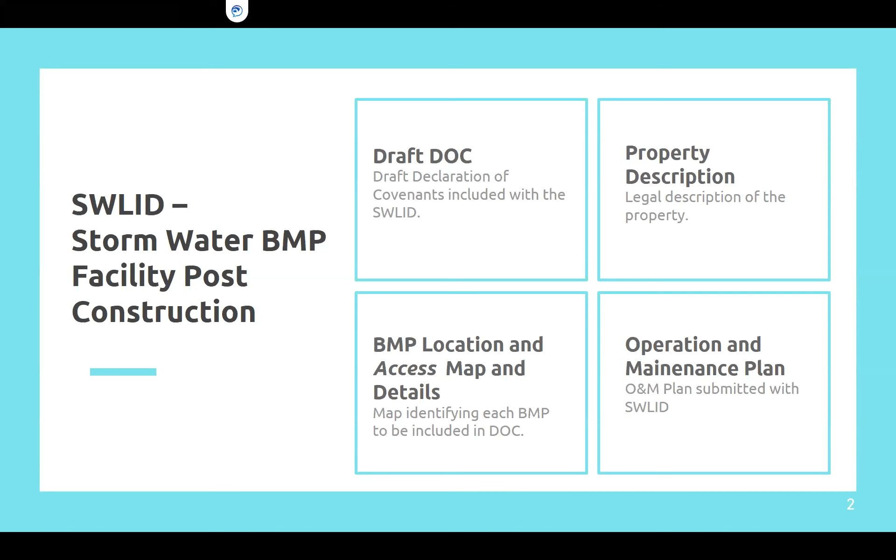Finally, a draft operation and maintenance plan must be submitted with the preliminary stormwater LID document, and Elizabeth is going to talk about the format of these maintenance plans.

And then we also created a template that added some background on what LID is, because we have homeowners that have no idea what LID even is. So we have a background, a description of each of the LIDs, a summary table showing how many there are and what they are, and then common identifiers. We've created specific identifiers for each type of LID feature so that as a town, when we get a bunch of these different LID features, we can have a map that tells us very easily what they are.

So the point of this is to have a standard O&M plan, and we created a template. It makes it easy for the engineer to just fill in the necessary project information. It makes it easier for us to review because we have the same setup every single time and I know where to find things. And it makes it really easy for the homeowner to have clear, simple directions on what they need to do.

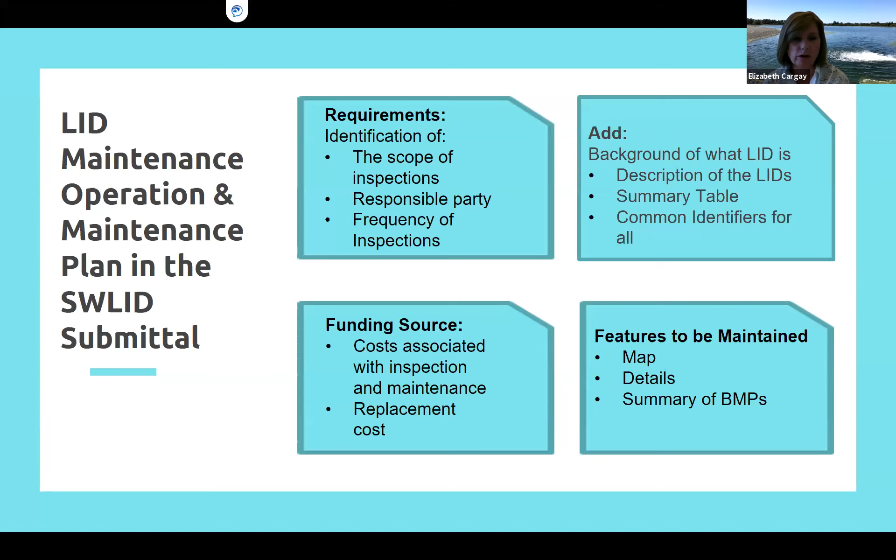So we created this template for all the engineers to use, and we had Christina Goulart from GHD help me put this together. This is a table of contents. There are 4 different sections here and some attachments. So we have an introduction, which gives background, and we have some standardized language — I'll show you in the next page.

But we also address who has to be the responsible person for maintenance, and do they have training? If it's in an HOA, you can't just have it be one of the homeowners — it's got to be somebody actually designated. The next section covers what the features are, giving the table and the details, and talks about the funding, the plants, and everything. Then the 4th section is the maintenance activities, the training of responsible parties, and the standards we've created for maintenance.

Next slide. So this is the first page, and you see some yellow highlighted areas — that's language that gives kind of instruction to the engineers. The first line says, provide an introduction about stormwater LID BMP features, what is LID, and then we have suggested language to include. We give you something to make it easy. It can be standard, but you can change whatever you want since this is a Word document. We have it up on our website for the Town of Windsor, and we're asking all projects to use this.

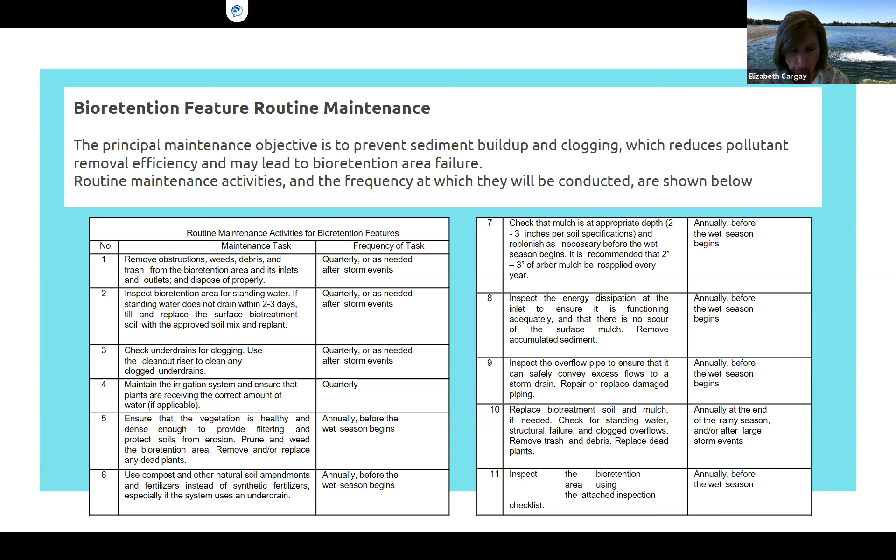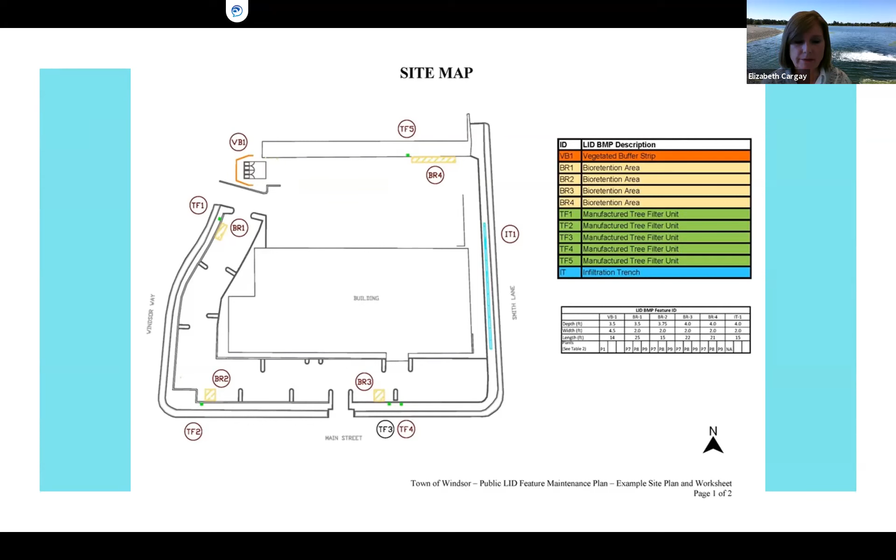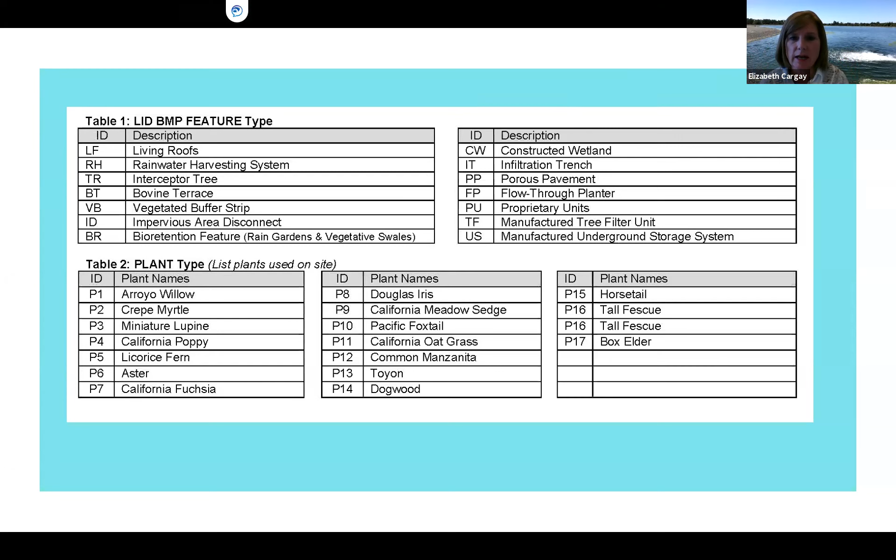Our plan checkers cross-check the vegetation types against the landscape sheets and the building plans to ensure that the vegetation is in compliance with the LID manual.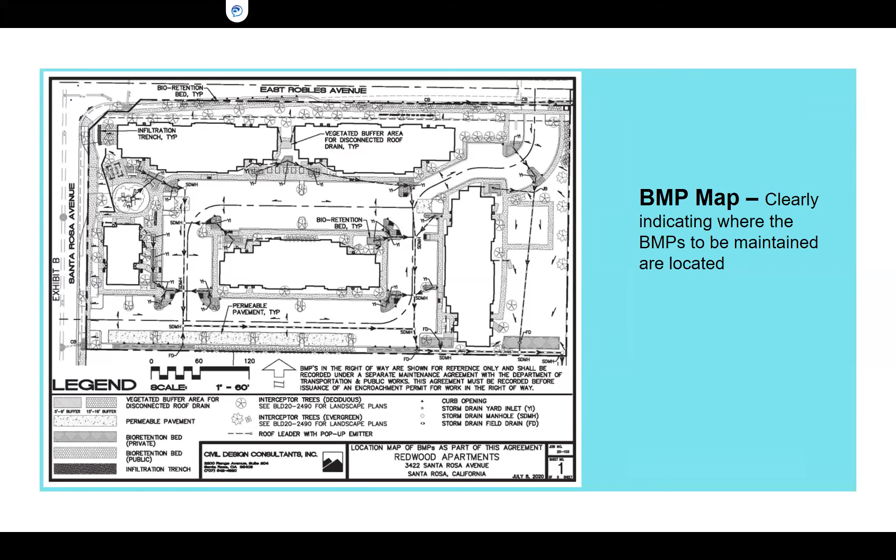In the new release of the LID manual, we will also be requiring that the BMP maps include how the features will be accessed. This is an especially important component of housing developments that choose to place BMPs in the backyards where access is potentially restricted. The developers, as well as future owners that review the recorded documents on the deed, should have some forethought as to how the co-permittee staff can access the BMPs for inspections.

So this is just a flow chart of the DOC process. At the end of the project, the developer signs a statement accepting responsibility for maintenance of BMPs until the responsibility is legally transferred. This responsibility should be a written condition of any sale or lease agreement in enough detail to be easily understood by future owners and tenants.

The conditions should make clear that the property owner or tenant is responsible for BMP maintenance and to conduct inspections at least once a year. The property owners should submit to their jurisdictions annually the results of these stormwater BMP inspections. The inspections include, but are not limited to, the maintenance checklists, photo evidence of the BMP's existing conditions, a report of any maintenance activity, remediation, and replacement of the BMP features.

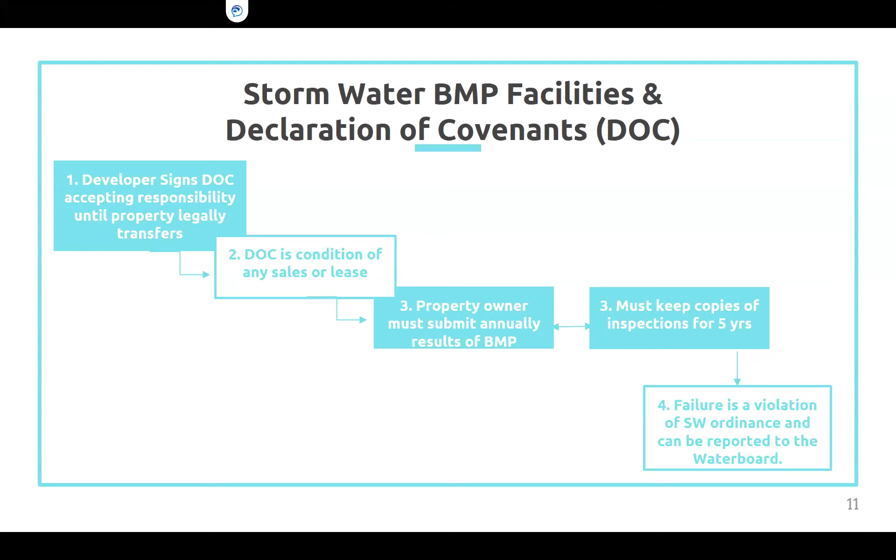Failure to maintain the BMPs will lead to progressive enforcement against the owner where necessary to rectify the failure to implement maintenance of post-construction BMPs. And this can ultimately lead to the county notifying the Regional Water Board and asking for their involvement to correct the issues if necessary.

This was leading into a talk from Ukiah that I'm not sure we're having, but anyway, these are some of my post-construction inspection pictures. I see a lot of well-maintained and functioning vegetation swales and detention areas from various LID manual versions.

The top picture maybe once had plants when the project finished, but now two years later, when I inspected it, they are long gone. This was an immediate corrective issue, and they've been replanted, and the area around the drain inlet has been protected.

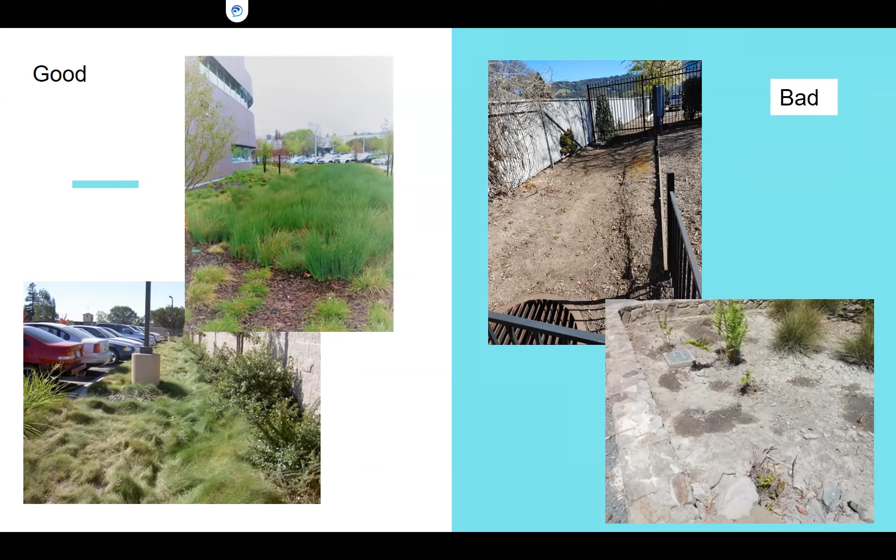The bottom one is a reminder of what in our current LID version is called the plant warranty. This project finished in 2016, and I did the first inspection in 2018, and the plants looked healthy and the landscape was well maintained. In 2020, when I did this inspection earlier this year, the plants are scarce and kind of straggly. Landscape maintenance is a continual process beyond the warranty period and for the lifetime of the development.

Finally, this is one of my favorite photos of a bioretention basin in Petaluma. It's working perfectly and is currently well maintained, but without the owners being aware of what this feature is and the requirements to maintain it, I would imagine it could easily be mistaken for a natural depression and filled in or utilized for some different purpose.

And that's all we got. Any questions? There was one that came in: how often should bioretention or structural soil and plants be excavated and completely replaced?

When it fails, if it's not infiltrating any longer, that's one of the key things, that's why you want to keep it up every year. If you're getting a lot of fine sediment, you want to get that out of there. Some of the manufacturers also have requirements, so you want to check what those actually require. Some of the trees, they're required to change out the soil every so often, like every 5 years. So it could be either way.

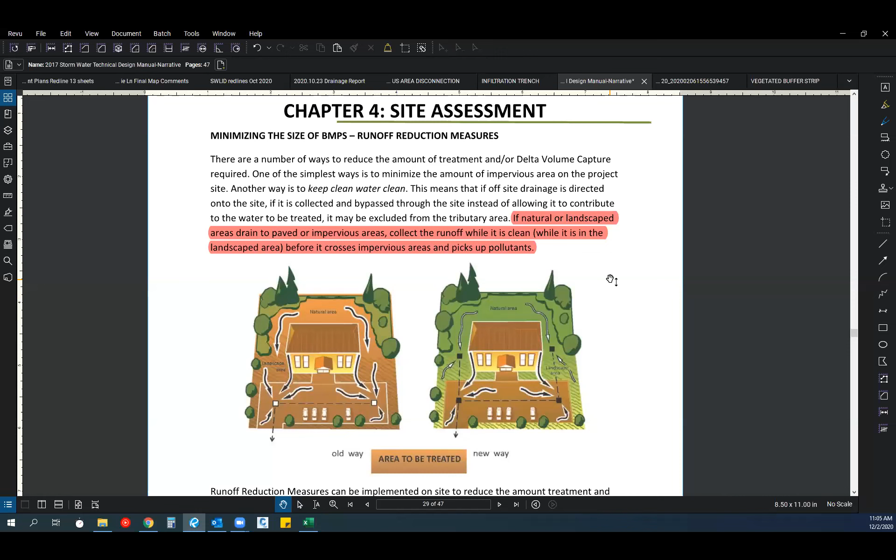Hello, my name is Nathan Fishman. I have a question, maybe somewhat rudimentary in nature, but I was hoping to use this as an opportunity. If I can, I was hoping to share my screen for a moment. I was looking at a portion of the manual here, in the area that discusses the efforts or actions we might be able to take to reduce the BMP sizing.

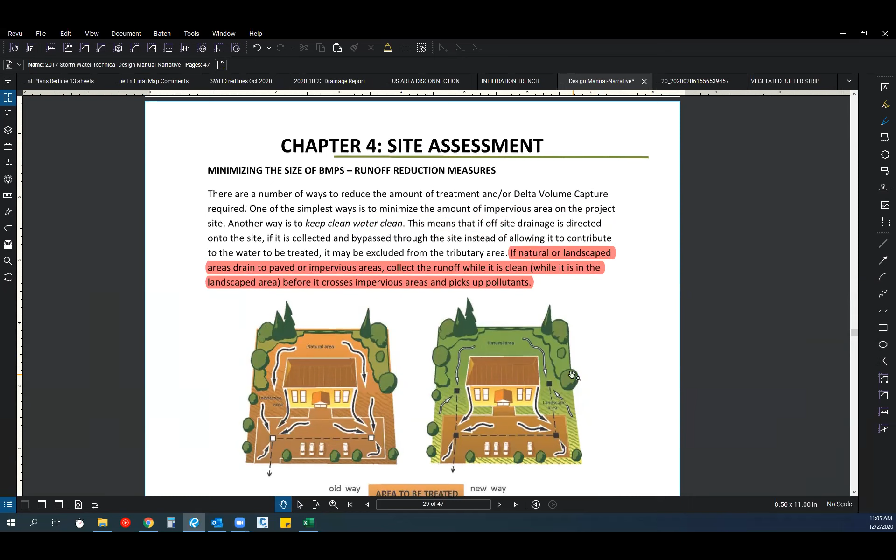It discusses, at least in this graphic, landscape areas being directed to inlets, and depicts that these tributary areas are not necessarily part of the area to be treated for the overall site. So my question is, for 100% landscaped areas, what contributions should we account for in the overall sizing if we're doing treatment or delta volume capture on a site basis elsewhere? Should we include these areas? And also, are these areas subject to trash capture, inlet protections and filters and such? Would that suffice if they're otherwise landscape?

Nathan, I think you can leave that graphic up if you don't mind, it might help the discussion.

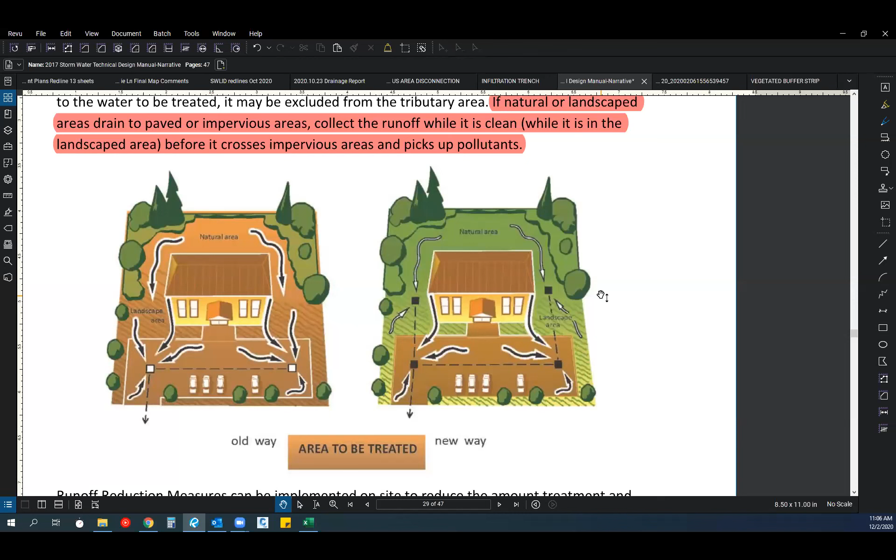I'm happy to. Yeah, and I realize this is a very simple figure, the reality of it is always more dynamic than this, but I guess I just mean to say, is there such a thing in this narrative as a self-treating area? If it's just a front yard that has some inlets for high flow events, but otherwise shouldn't really be contributing pollutants or load under a performing scenario.

So Flannery, do you want to take that? And I would also kind of open this up to the other reviewers on the phone. You may not have presented, but you guys look at this a lot, so if you have input, feel free to chime in.

Flannery, do you want to take the first stab here? Yeah, the first stab is, in general, trash can end up anywhere.

I think the tables will help with this question, because it's broken down a little bit into what your project is proposing. So it's the existing tables you've seen in the manual before, but it has footnotes and callouts of when the 5 millimeter is being triggered.

But in short, I would tell you that part of the way you want to think about it is anywhere that people are and that wind can blow, we end up with trash there. And that's part of why in the trash amendment, you see the requirement for basically all catchments.

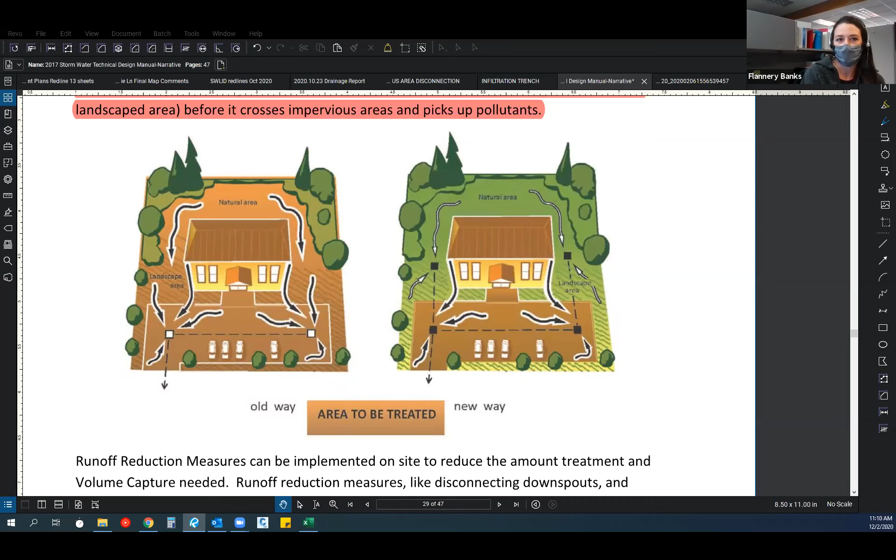Great. Can I, Nathan, comment on that great real question, quick? Nathan, yes, go for it, Matt. Okay, so I think it's a great graphic for a designer to look at, but I don't think there's anything in the LID calculator that directly takes care of that. In other words, what you get in the LID calculator is what you get: interceptor trees, disconnected roof drains, paved area disconnection, buffer strips and bovine terraces, and those are your options.

Okay, thank you all, I appreciate the clarification. I think that's helpful, thank you for your time. No, that was fantastic, and I appreciate you using the share screen to give us the visual on that. It's a nice part about this particular platform, rather than us all trying to speak a different language and try to understand what was in your head. So thank you. I would open it up if anybody else has something similar where you want to share your screen, happy to relinquish control here. Are there any other questions in regard to LID or clarifications or feedback?